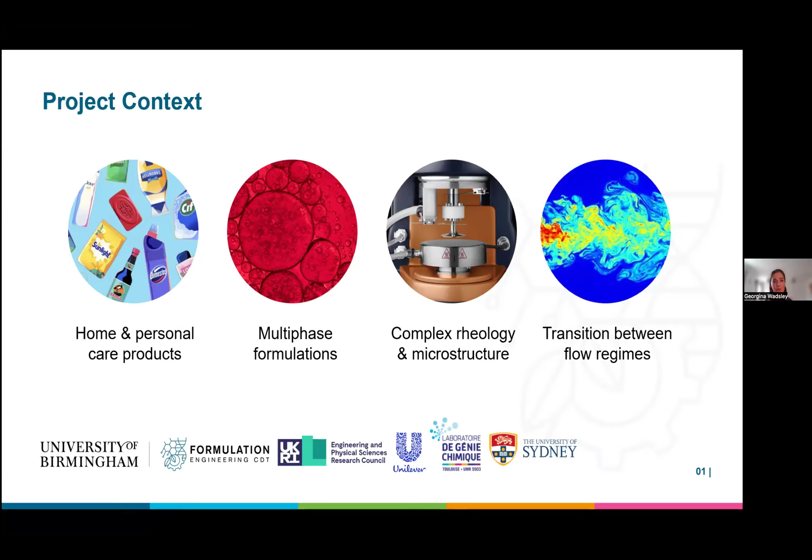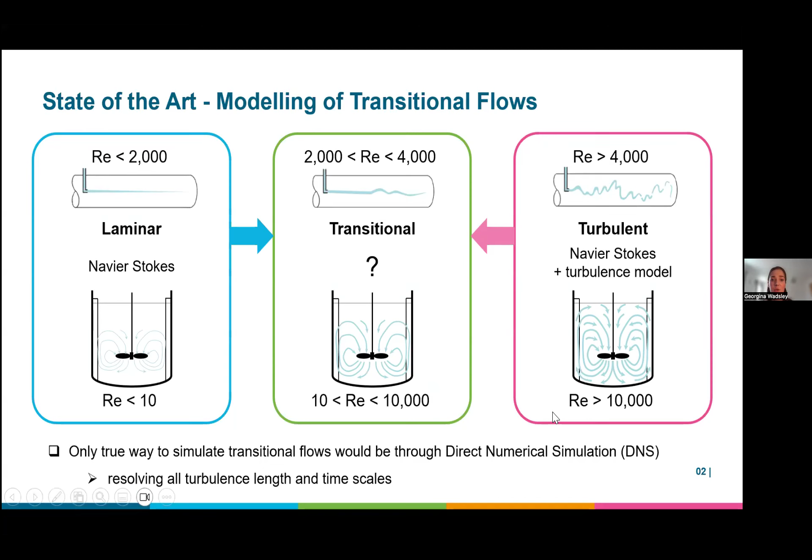Currently, we know we can use models in CFD, computational fluid dynamics, for modeling stirred tanks and pipes in the laminar regime through direct solving of the Navier-Stokes equations, as well as with the application of many turbulence closure models for high Reynolds number flows. However, when you move into the transitional regime, how we can do this in an industrially viable way is not yet clear. So the only true way to simulate these transitional flows would be through direct numerical simulation, resolving all turbulence, time, and length scales, which would be highly computational and not feasible in industry. So what's the next best thing?

So Mercado et al. found that the transitional regime, although typical values are given between Reynolds numbers of 10 to 10,000, some people have found that even at Reynolds numbers as high as 300,000, fully developed turbulent flow was not yet seen in the full height of the tank.

As well as looking at flows for similar Reynolds numbers within the transitional regime, they should exhibit self-similar flow hydrodynamics. Both Mercado et al. and Mendoza et al. observed that the mean velocity profiles are not self-similar and depend on viscosity and tip speed in the transitional regime. I performed an initial pipe flow study that I won't discuss here, but this also revealed a lack of Reynolds number self-similarity of pipe flow past an orifice plate.

So often the frequency of perturbations in transitional flow means some instabilities may persist longer for some fluids than others. So my aim is an investigative approach.

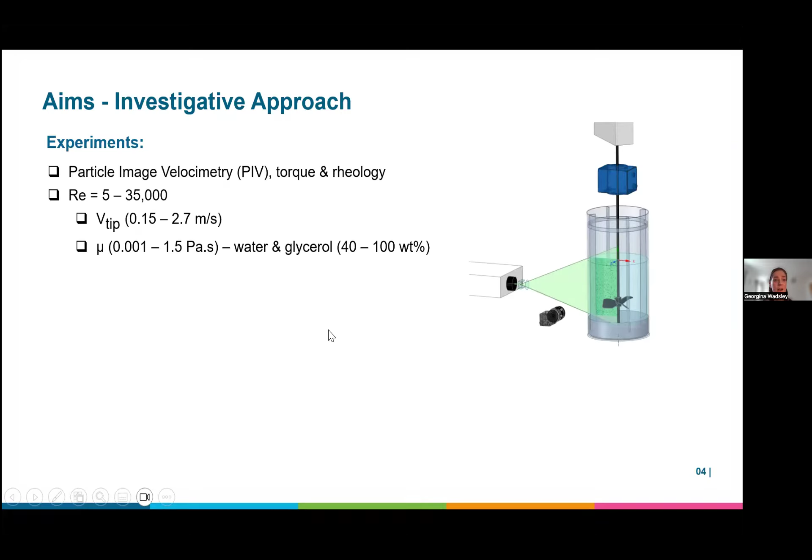I use particle image velocimetry as my experimental technique, as well as torque measurements and offline rheology. All the experiments and simulations I will present today were for Newtonian fluids, so not yet introducing this next level of complexity. This was for different Reynolds numbers varying between 5 and 35,000, using water and glycerol.

The aims were, from the torque experiments, to find the power number and Reynolds number relationship when looking at the power curve, as well as observing trends based on the literature review in normalized velocity magnitude and normalized turbulence kinetic energy, looking at changing Reynolds number for constant viscosity fluids to establish regime limits, as well as looking at self-similar Reynolds numbers with different viscosity and tip speed to look at scaling and self-similarity.

However, with the experiments that I did, I performed averaging over all blade positions. So I then looked at proper orthogonal decomposition, which is a technique that can be used to break down instantaneous flow fields into orthogonal modes.

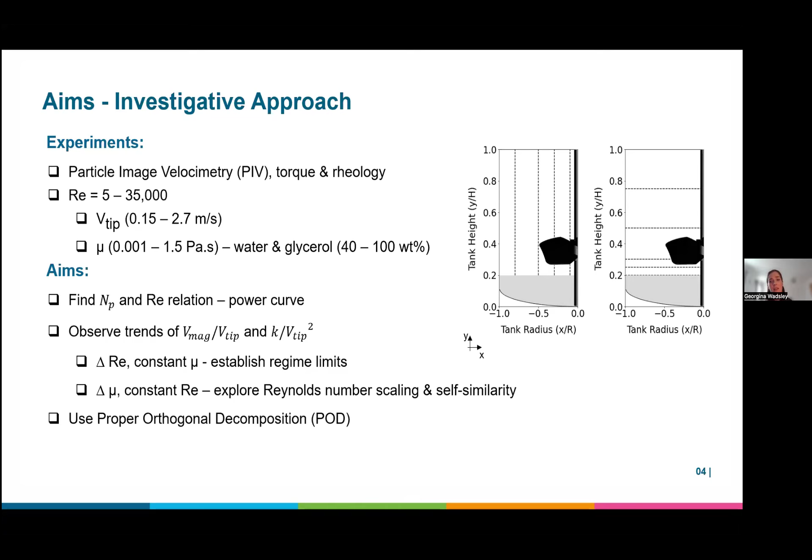And this has the potential to help distinguish between true turbulence and the pseudo-turbulence that is introduced through the periodic rotations of the impeller.

And then finally, looking at using all this experimental validation work to validate CFD simulations and explore existing turbulence closure models such as K-omega SST, using ANSYS Fluent here.

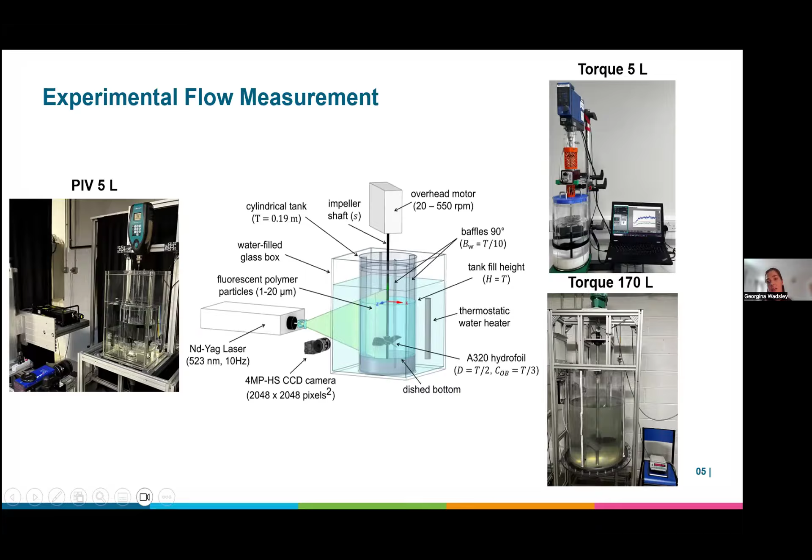So first, my experimental flow measurement. These were the different setups that I used: PIV and the torque on the right. I also performed all my experiments mostly at the small lab scale, in a 5-litre tank. But the torque I also performed for validation at the larger scale, with 170 litres.

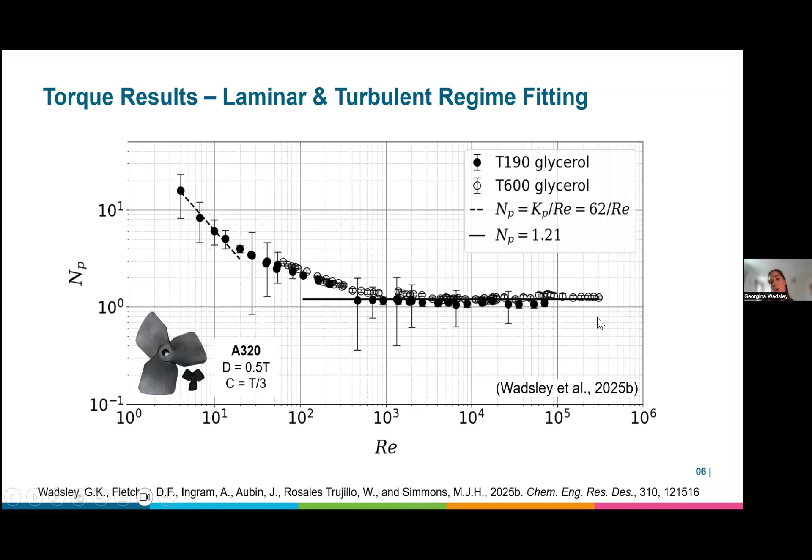So these are results from my torque measurements. Experimentally, I found that for the A320, with impeller half of the tank diameter and an off-bottom clearance of a third, and the tanks also baffled, the power number was around 1.21, and the laminar constant was 62.

So mainly looking at the flow fields, obviously there was a wide range of Reynolds numbers that I looked at. So I gathered a wide range of data, and it's about how to extract what is most important.

Therefore, within the same tip speed range of the impeller, the Reynolds number increases. However, the transitional regime boundaries were found to change with decreasing fluid viscosity. For example, to transition to fully turbulent flow, you need a higher Reynolds number for lower viscosity fluids.

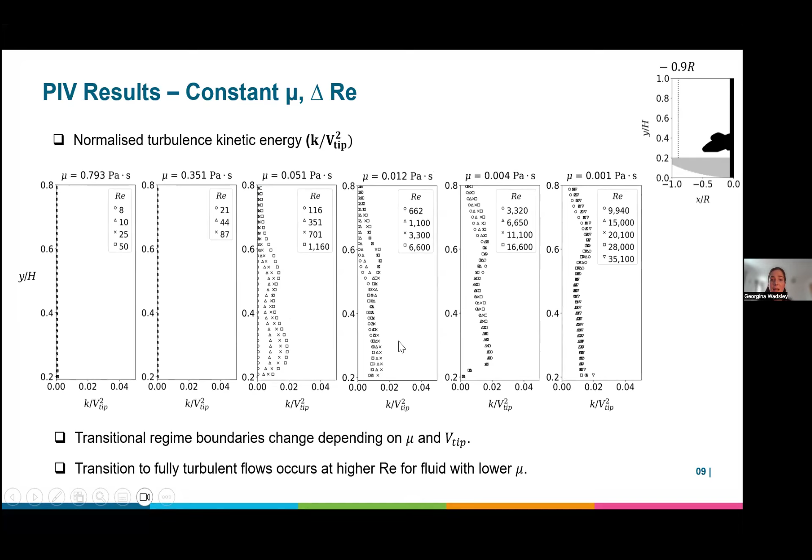And this is the same for turbulence kinetic energy. You see a collapse of flow profiles as you increase in Reynolds numbers, yet the collapse is at lower Reynolds number for higher viscosity fluids.

However, if you look away from the impeller, the flow is actually not yet fully turbulent as you would expect. So Reynolds number independence is true only near the impeller, and this causes a level of complexity when you want to try and model that using CFD.

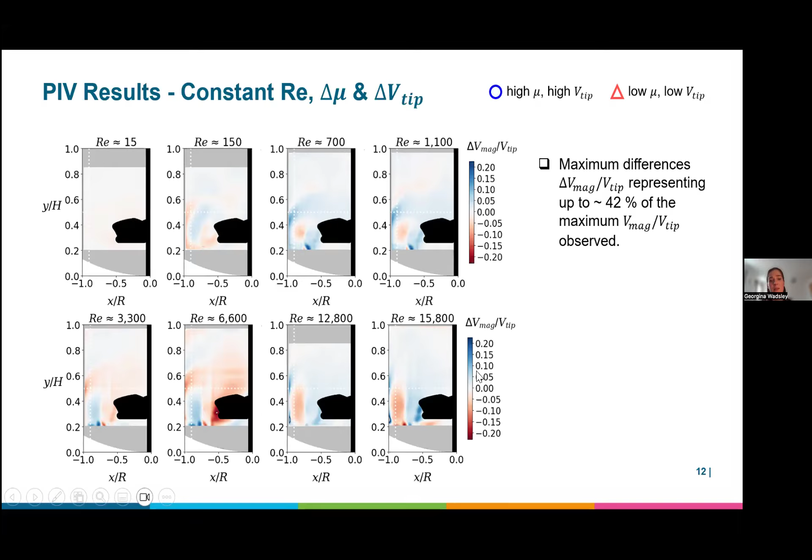This is the velocity magnitude, and a similar thing was shown with the turbulence kinetic energy differences. At these lower Reynolds numbers, the differences are very small, yet throughout the transitional regime, despite similar Reynolds numbers, the complex interplay between the viscosity and tip speed shifts the balance between the energy input and the flow resistance, leading to a slight difference in the flow patterns observed.

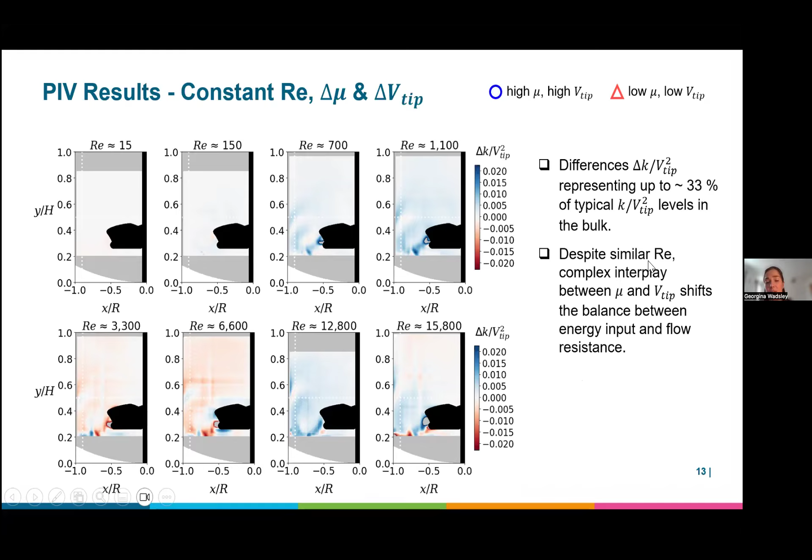And here the differences represent up to 33% of the typical levels of turbulence in the bulk flow. Again, this just highlights that the normalized mean velocity profiles do not exhibit Reynolds number self-similarity.

But how can we get this out of CFD simulations when CFD simulations are based on the Navier-Stokes equations, which typically are normalized to depend only on the Reynolds number?

So proper orthogonal decomposition, I'm not going to go too much into the background of how this is done, but more how this can be used. This is a technique used to break down instantaneous flow field data into a set of orthogonal modes ranked by their energy content. The first piece of information we can get out here is the eigenvalue spectrum.

So how the kinetic energy of the fluctuating velocity field is distributed across the modes. This straight line here is the slope of the modes to minus 11/9, which relates to the inertial subrange of fully turbulent flow. This is for a very low Reynolds number, but as you increase in Reynolds number, you would expect this energy distribution to be higher. Also, this plot only shows the modes containing 95% of the energy.

So for large scale motion, we start here, and as the scale of turbulence decreases, so we have high energy, large scale motion. As you decrease down the cascade, you get to smaller and smaller scales with smaller amounts of energy.

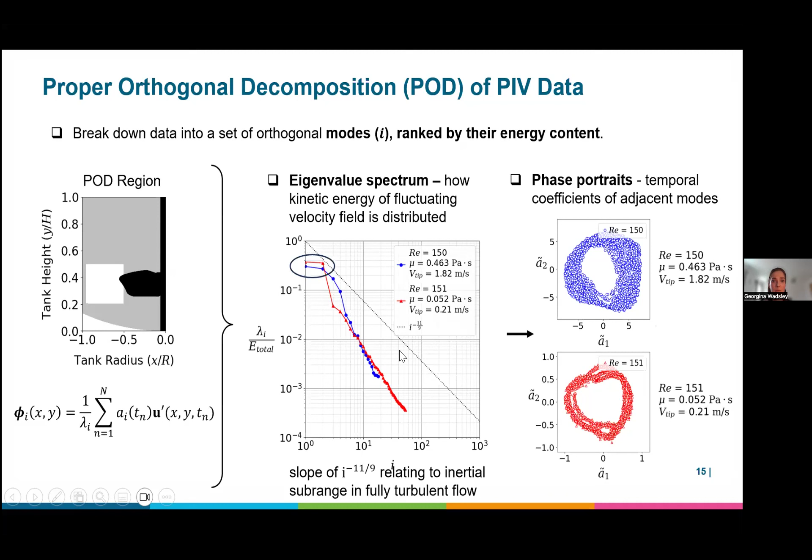This here shows the phase portraits of those two between the first and the second mode. The spatial coefficients identify the most dominant patterns or structures belonging to each mode. So here the first mode is most representative of the turbulence kinetic energy within the region that I have done this over.

And then more here you can see the breakdown of where the rest of the energy is distributed. So you could begin to see why there may be some differences between two cases at a similar Reynolds number. You can see modes 3 and 4 here are quite different to modes 3 and 4 there, and there you get a difference in the energy distribution, which could lead to a difference in the flow patterns observed between two cases that have a similar Reynolds number, yet different viscosity and tip speed.

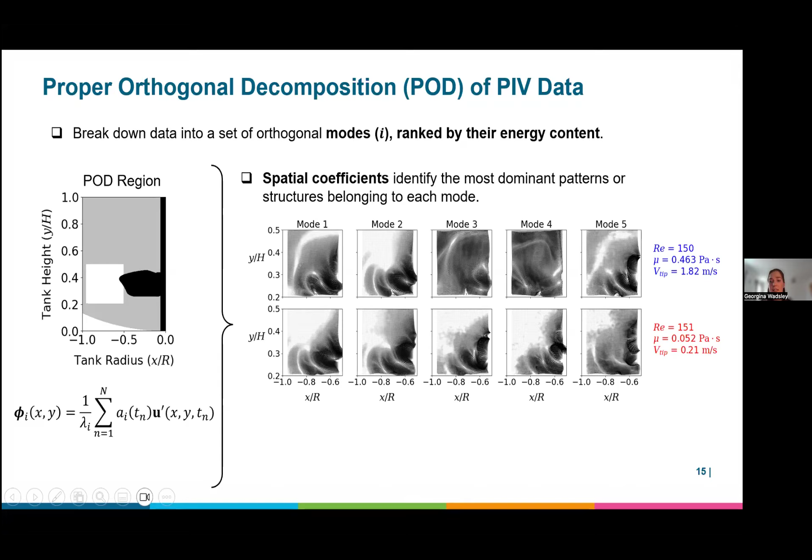There is a limitation, however. My PIV acquisition frequency was capped at 10 Hertz just due to the abilities and scope of the equipment available. So in this PIV data alone, we cannot see whether this may also have frequencies related to the impeller frequency.

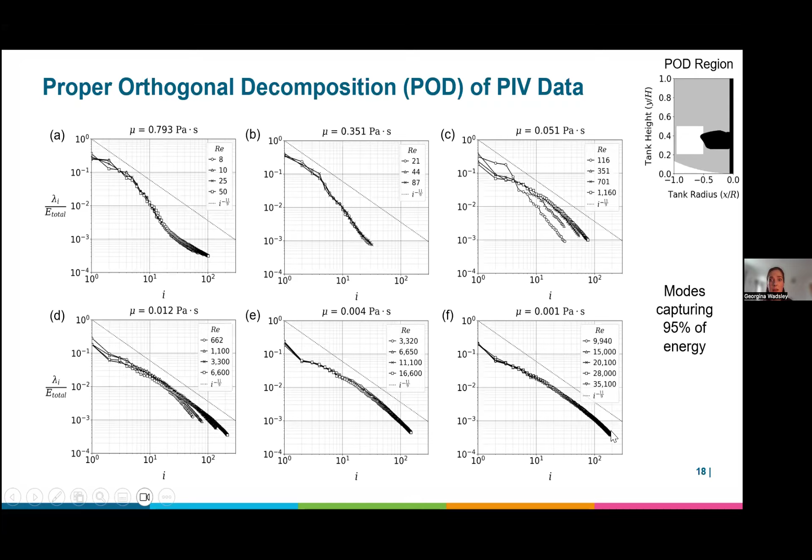This could be useful when trying to model or compare simulation and experimental data. And then you see when you start to reach the fully turbulent regime, the eigenvalue spectra are quite similar. So have we actually reached the fully turbulent regime?

So onto the CFD validation. The model I've chosen is stress-blended eddy simulation. So why this? LES is the spatial filtering of the Navier-Stokes equations, which resolves large-scale turbulence up to the limit of the grid or mesh, and models small-scale structures less than this.

This is of greater computational accuracy than the RANS model, which involves the averaging of the time or ensemble averaging of the Navier-Stokes equations, but must introduce the Reynolds stresses, which then need to be resolved with the addition of a turbulence closure model. Here it's the K-omega SST closure model.

RANS works quite well close to the wall, whereas LES requires the addition of wall functions when resolving close to the wall. And here in the stirred tank, you have the impeller and the walls, so this is very important in confined flows.

SBES is able to switch between the two. For example, with this default blending function, the red represents where the model will run in RANS, and where the model will run in LES. This also showed promise in my pipe flow study as well.

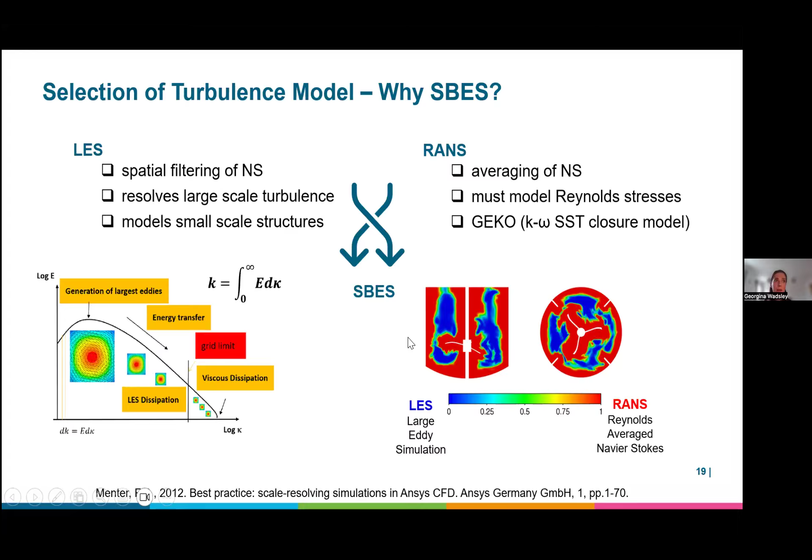So how the simulations are set up: data sampling on a fixed plane, averaging over all blade positions to get the same type of data that I got from my PIV measurements.

I also looked at taking periodic sampling, so every full rotation, to try and estimate the pseudo-turbulence due to blade contributions, when comparing averaged data at a specific blade position versus over all blade positions. But I really focused on looking at all blade positions because this is directly comparable with the PIV data I had, and then performing transient sampling, and on this also doing proper orthogonal decomposition on my experimental data.

One thing that's very important with the stress-blended eddy simulation and LES models is to ensure that the number of rotations, or the amount of data collected, is sufficient to have a stable averaging of the velocity, magnitude, and turbulence kinetic energy.

A few simple solution checks must be performed when using SBES. So you have the wall Y plus, which must be small enough for the Navier-Stokes equations to integrate straight to the wall. The cell convective Courant number must be around 1 or less than 1 in order to get a good estimation of flow.

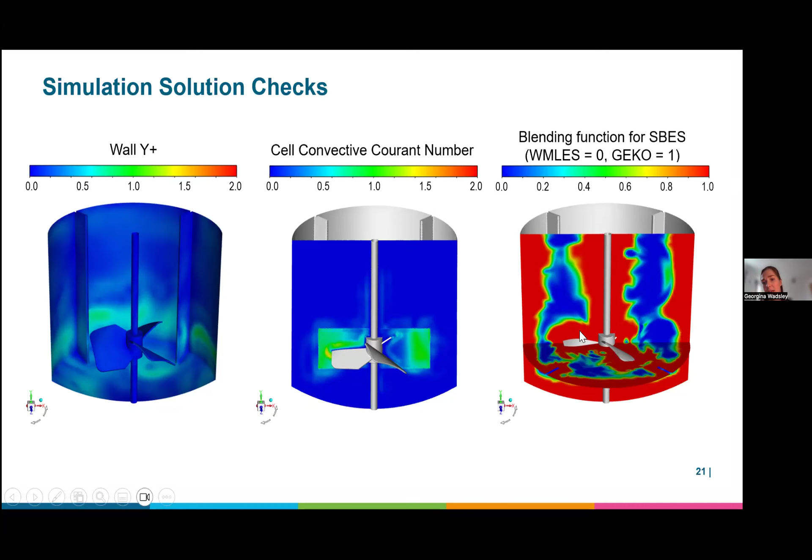However, when running some of my simulations, I found that the default blending didn't necessarily work so well, or it couldn't trigger the LES in regions where you would want it, resulting in insufficient triggering of LES. So at high Reynolds numbers of 35,000, LES was triggered very well and covered most of the flow. At 700, the LES region was reduced, and at 300 this was reduced further.

So in order to compare, I also looked at running with a fixed blending distance, so that I could compare the GEKO model, SBES, and SBES with a fixed blending distance to see the effect on the results. For torque validation, I used the laminar model in the laminar regime, but I've also looked at all three models across different regimes.

The laminar model was validated for torque prediction in the laminar regime. The GEKO and SBES closure models were validated for impeller torque across all regimes, and the results fitted very well with the power curve. So if you're just wanting to look at the level of torque from the impeller, that's okay.

However, when looking at the torque balance between the impeller and the walls, therefore the ability for the simulation to capture and resolve the distribution of eddy dissipation from the impeller right the way through the fluid.

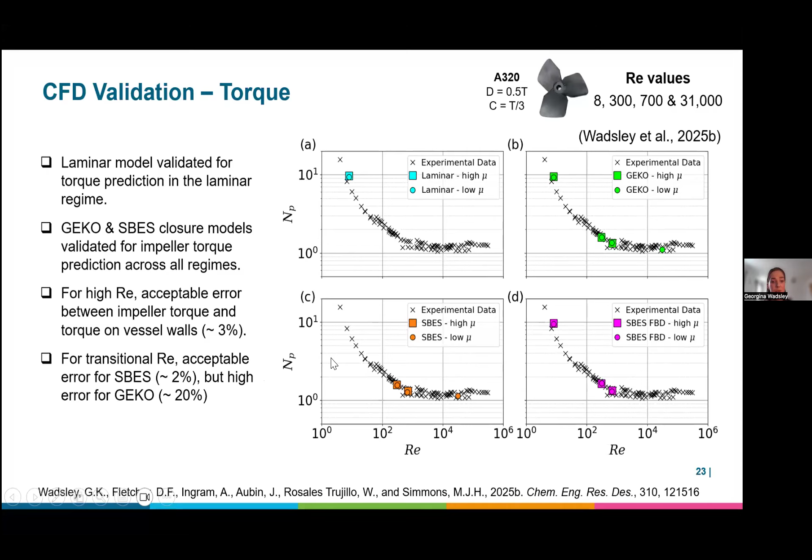Just for a simple check, I ran some laminar steady state solutions. My aim was to work from low Reynolds numbers and push the laminar model up to where it didn't work anymore, before then looking at the turbulence closure models, working from a high Reynolds number and pushing them downwards to see where they work well or where they start to break down.

And again, as we move up and really use the laminar model where you wouldn't expect it to work, we start to see unrealistic flow fields, necessitating the use of turbulence closure models.

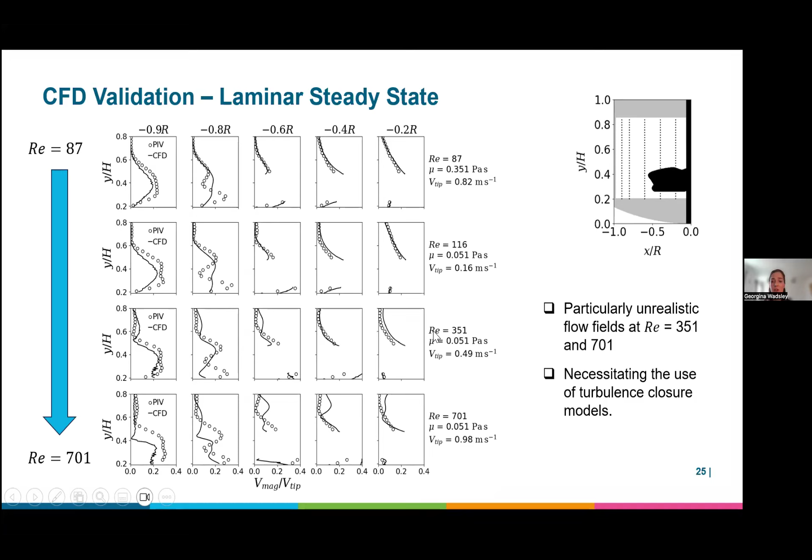So, like I said, now we're using the turbulence closure models and we're working down from fully turbulent flow, pushing them into the transitional regime.

Yet when we look at the normalized turbulence kinetic energy, the flow profiles are quite similar for SBES and PIV. However, the flow profile of GEKO predicts areas of high turbulence regions in unexpected locations, particularly above the impeller. You can see this as it doesn't quite follow the axial and radial profiles as well. It still does an okay job, but when you look at this contour, maybe not.

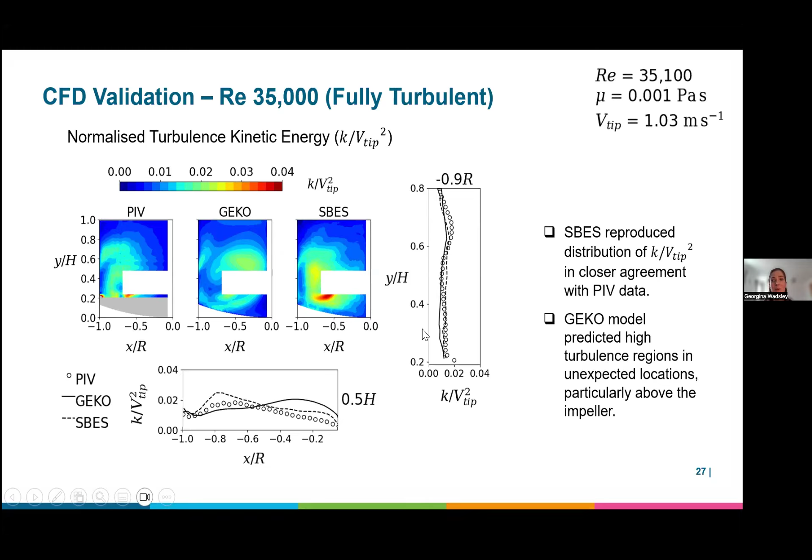And then looking at the SBES model, comparing the POD results between PIV and SBES, we see quite a similar distribution of the turbulence kinetic energy between the modes containing 95% of the energy.

Notable at this high Reynolds number, the slope of minus 11/9, which represents the inertial subrange of turbulence, we're looking at a gradient quite similar to this. So it looks like we're in fully turbulent flow.

In terms of the temporal coefficients, as I mentioned before, the PIV data is somewhat restricted by the Nyquist frequency for measurement acquisition from the PIV. So we can't see whether or not there are any peaks at harmonics of the impeller frequency, and therefore if we're seeing true macro instabilities or not.

Yet the SBES is showing a very similar distribution, with a large magnitude of low frequency peaks which could represent macro instabilities.

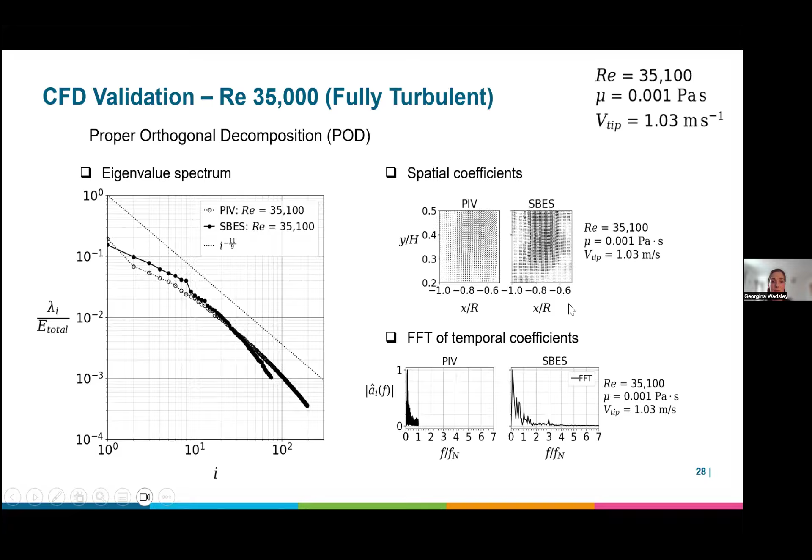This is more obvious when you look at the axial and radial flow profiles. The SBES more closely predicts what we observe.

However, despite differences between the two experimental cases at a similar Reynolds number, all the turbulence closure models - GEKO, SBES, and SBES with the fixed blending distance - we always see self-similar results.

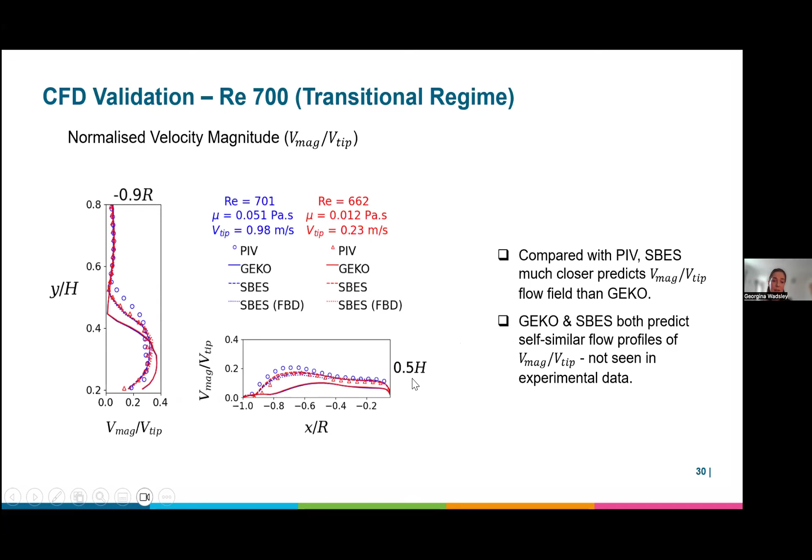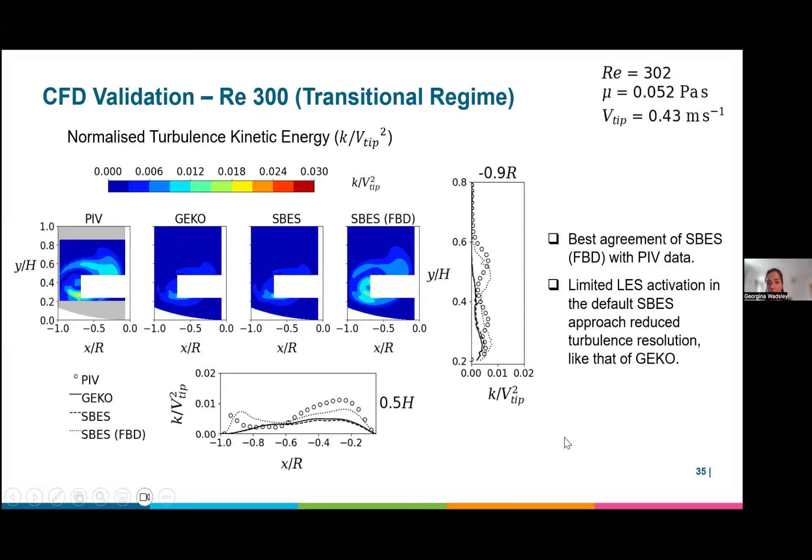So we've compared this SBES with fixed blending distance and the proper orthogonal decomposition results. Again, we see a very similar distribution of the turbulence kinetic energy between orthogonal modes when broken down, a very similar spatial distribution. And here we can compare the frequency at which we observe the spatial distribution of the turbulence kinetic energy.

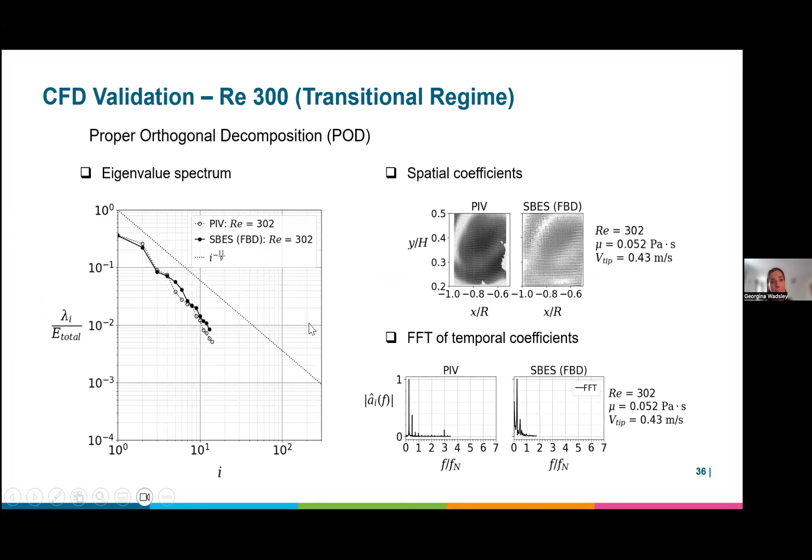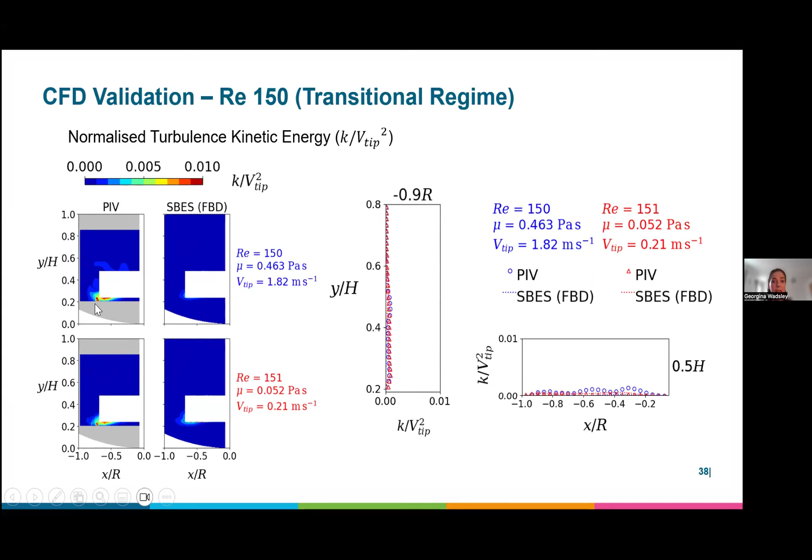Now we're moving more to the lower transitional regime. Here I've just chosen to compare the SBES fixed blending distance results, as we know that we're not going to receive as much LES activation, or sufficient LES activation, at this low Reynolds number. But it does show the promise of the SBES with fixed blending distance, even at this low transitional Reynolds number, and again a very small turbulence kinetic energy. Although there is slightly more turbulence kinetic energy observed in the PIV data, which can be shown here by the distribution of the turbulence kinetic energy between modes, where the SBES FBD model concentrates most of the fluctuation energy in fewer modes than observed experimentally, which may show slightly higher fluctuation, a higher level of small fluctuations in the experimental data that are not observed computationally.

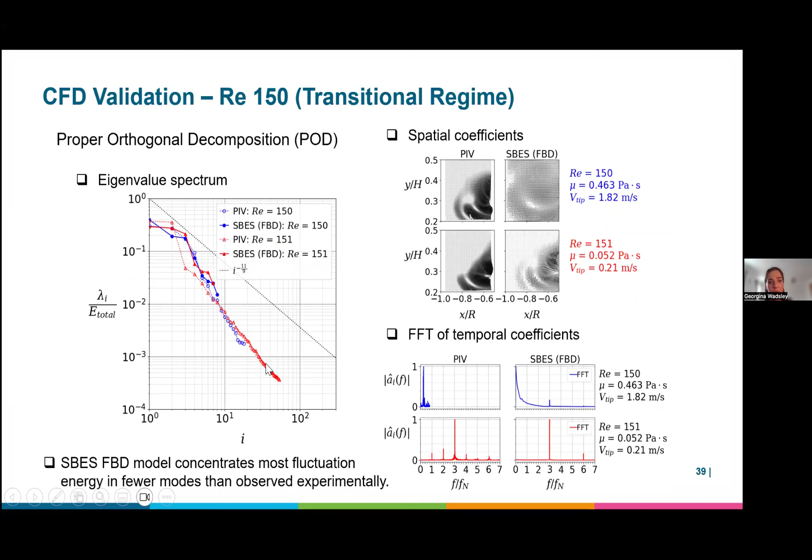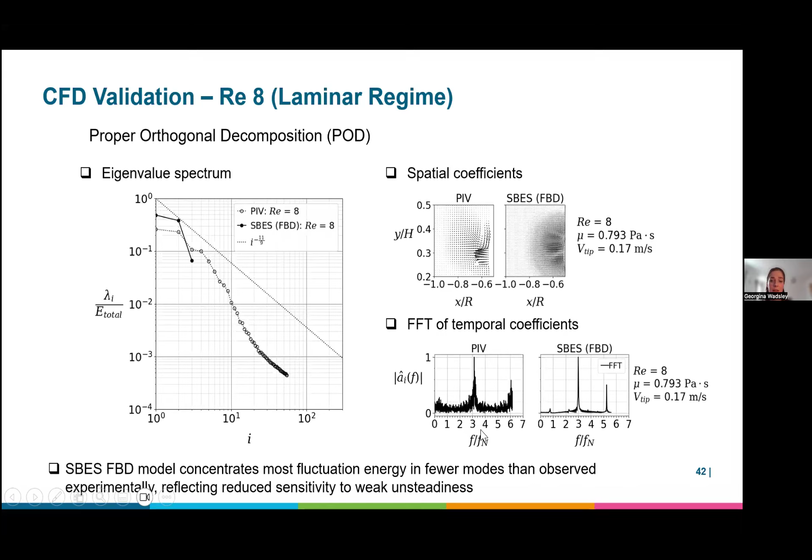So at 3 times the impeller rotation frequency, that's equal to the blade passing frequency, and we see large peaks at 3 and 6 for both the PIV and the CFD data.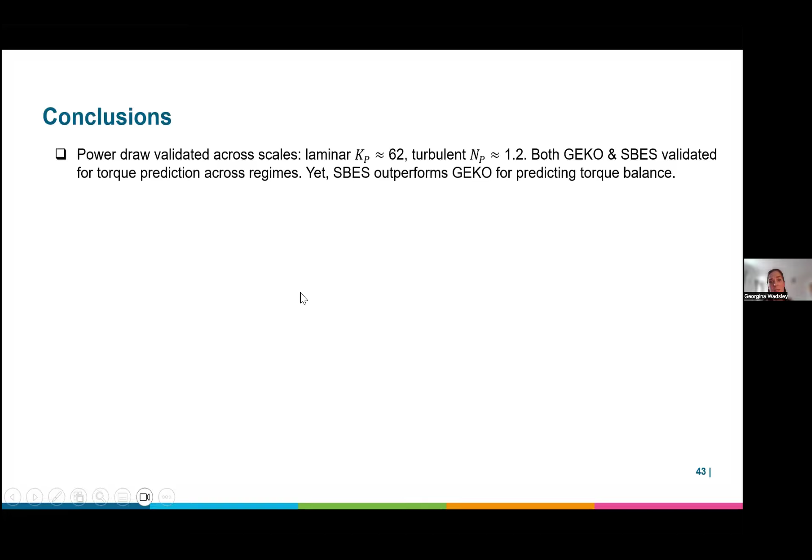So my conclusions are: the power draw is validated across scales. So we have a laminar constant of 62, the turbulent power number is 1.2 for this A320 impeller. Both GEKO and SBES are validated for torque prediction across regimes, yet SBES outperforms GEKO for predicting torque balance. The transitional flows are spatially heterogeneous. Turbulence begins near the impeller at a Reynolds number of around 1,000, and does not reach fully tank-wide fully turbulent behavior even at a Reynolds number of 35,000.

The viscosity and tip speed shift transitional boundaries, with high viscosity fluids reaching Reynolds independence earlier. Reynolds number alone is not necessarily a universal scalar - identical Reynolds numbers can give different distributions in turbulence kinetic energy experimentally, yet the turbulence closure models always predict self-similar flow. However, the proper orthogonal decomposition shows a shift from coherent to chaotic dynamics with mode energy spreading, and suspected low frequency macro instabilities emerging in transitional or turbulent flows.

The GEKO model provides sufficient solution accuracy for prediction of high Reynolds number flows with minimal computational expense, although it's not suitable for modeling transitional flows.

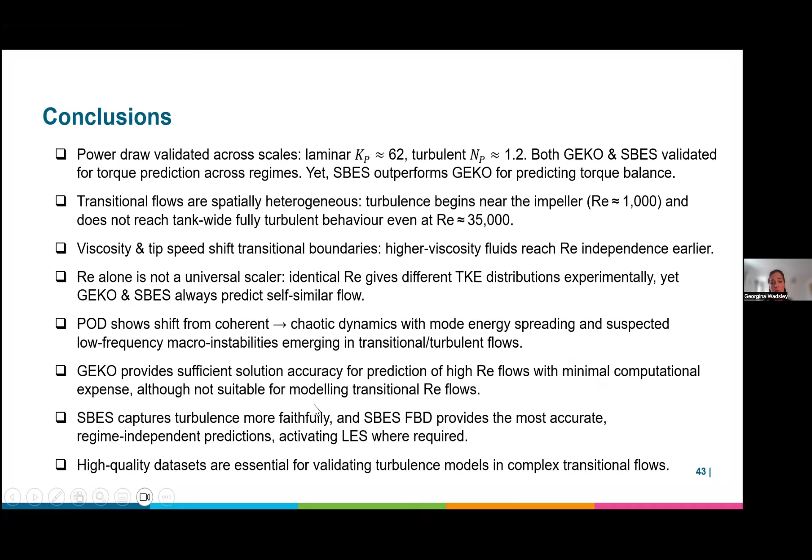The SBES shows a lot of promise, capturing turbulence more faithfully, and the SBES with fixed blending distance provides the most accurate regime-independent predictions, activating LES where required. This highlights that high-quality data sets are essential for validating turbulence models in complex transitional flows.

Here are some notes for future work following on from my thesis: start exploring alternative multi-parameter scaling approaches and move beyond Reynolds number by incorporating local shear rates, viscosity, tip speed. These are all suggestions for what to look at next.

Ensure to increase the temporal resolution of PIV, with a Nyquist frequency greater than three times the rotation frequency, as this would increase the reliability or usability of the proper orthogonal decomposition.

Extend studies to non-Newtonian fluids. This was all done in Newtonian fluids, and assess how complex viscosity behavior shifts the transitional regime onset, distribution, and power draw. It's also important when doing this to evaluate and compare rheology models, focusing on parameter sensitivity and avoiding overfitting, and improve confidence in effective viscosity predictions.

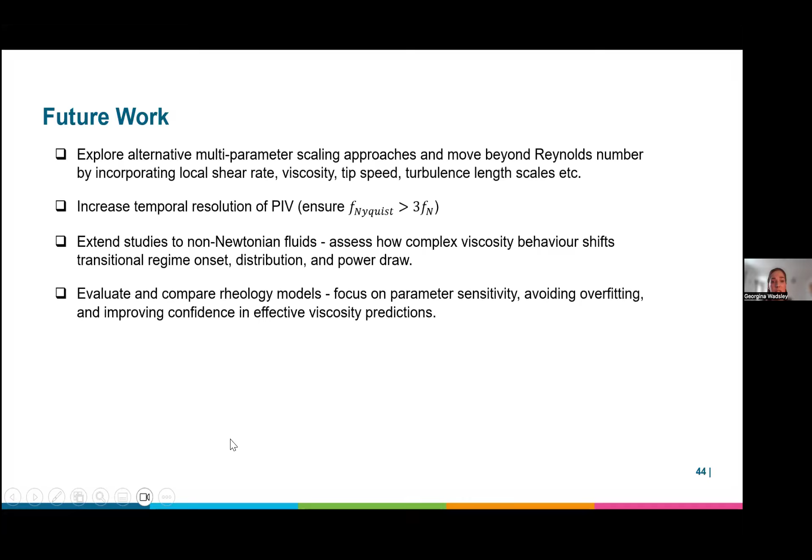I think the SBES FBD model does show a lot of promise in modeling transitional flows. However, this could be refined, optimizing the blending distance and exploring adaptive flow-dependent blending to balance turbulence resolution with computational cost.

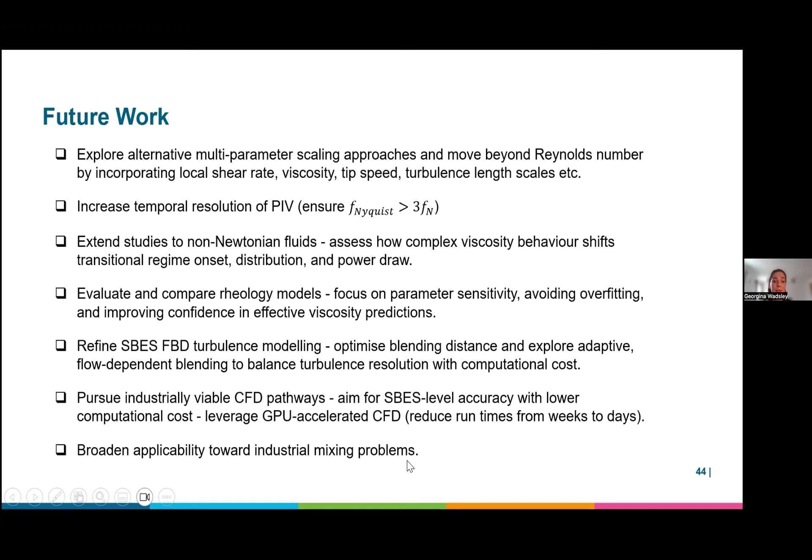Also, it's important to pursue industrially viable CFD pathways, aiming for SBES level accuracy with lower computational costs. This has improved a lot throughout my PhD with the ability to leverage GPU accelerated CFD, reducing runtimes from weeks to days, and broaden the applicability towards more industrial mixing problems.

So thank you very much for listening, and I'm happy to answer any questions or discuss.

And the question that I wanted to start with is why move to large eddy simulations to begin with? Because there are definitely some articles out there that show that Reynolds averaged Navier-Stokes simulations can quite adequately capture mixing behavior.

For example, the paper by Coroneo et al. from 2011 shows this convincingly, I think, for a single Rushton stirred tank system. And also, well, there has been some debate about whether you need a certain turbulent Schmidt number in order to accurately predict mixing or not.

But also this article says, well, you don't have to tune anything as long as you have your mesh in order and your turbulence model selected well. Which was very nice, of course. And compared to LES, RANS does still save us a lot of time, even with GPU acceleration.

However, when we looked a little bit deeper into literature and started looking beyond the single Rushton system - this was during my PhD in 2016, 2017 - we saw that with multi-impeller systems, Reynolds averaged Navier-Stokes models tend to predict mixing quite a bit less proficiently, or at least you would have to tune the turbulent Schmidt number in order to get adequate predictions of the mixing time.

And relating it to the statement of Coroneo about turbulent viscosity, we thought, well, let's have a look into that. Apparently with one impeller, things are going well, but as soon as we expand to multiple ones, things are not going so well anymore. So probably the issue is really in between the impellers and not around them.

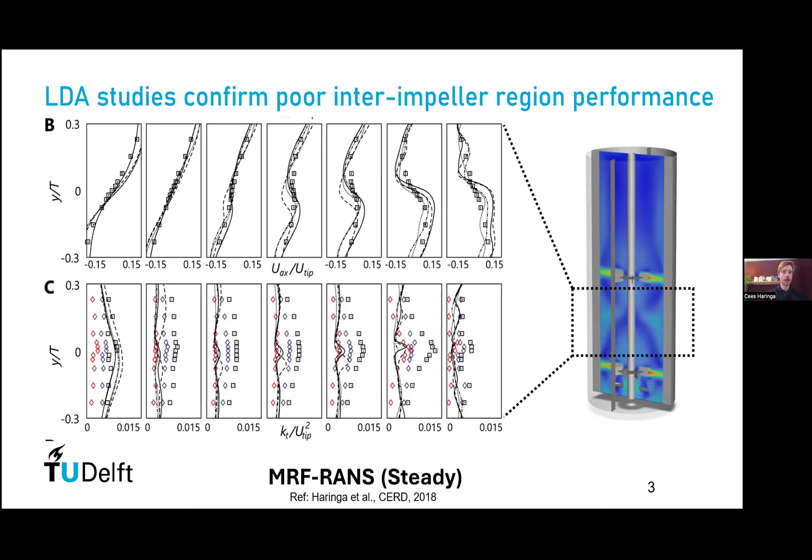So we moved on to different modeling approaches, one of them being large eddy simulations, and there we saw that with the appropriate treatment of turbulence, we could predict this peak in turbulent kinetic energy in the midplane between the two impellers. And then if we look at the implications for mixing time, also there we saw that the mixing time was very strongly impacted by this behavior.

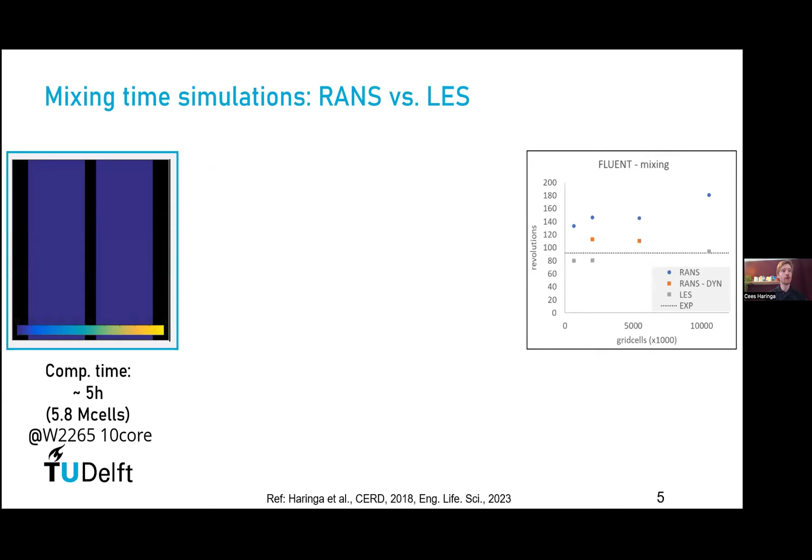If we look at the simplest situation, multiple reference frames, we saw that the mixing time was largely over-predicted, and eventually this over-prediction got worse with increasing mesh resolution, because the boundary between the compartments formed around the individual Rushton impellers became sharper and sharper.

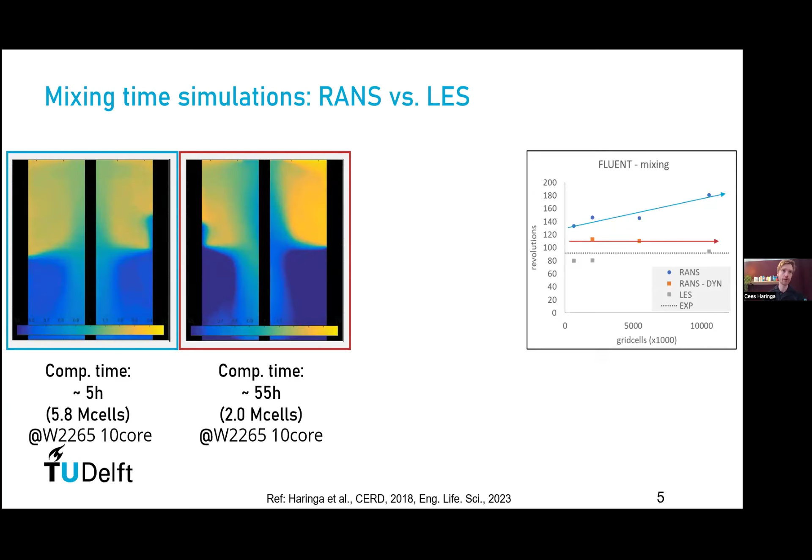If we then move to a sliding mesh RANS simulation, we did capture the impact of macro instabilities on the situation, which led to a situation that still over-predicted the experimentally determined mixing time, but didn't show the mesh resolution dependence anymore. And when we moved to large eddy simulations, we did see that we could also quantitatively predict the mixing times very well, in accordance with the experiments.

However, as you can see from the slide here, the computation time back then on a desktop CPU would increase a lot. Of course, we did not actually run this on a desktop CPU, but just for comparison, we also provided those numbers.

So we needed LES to accurately predict mixing time in this system, at the cost of computation time. Now, as was already mentioned in the previous presentation, nowadays we can luckily benefit from GPU accelerated methods. In this case, we also ran a Lattice-Boltzmann simulation a couple of years ago of the same system, where we could reduce the computation time for the whole mixing procedure to 17 hours. And also for finite volume, you see that these methods are becoming more readily available.

But this is still a single simulation. And in the end, we want to compare different cases, and we also want to know how robust our predictions are. So this is still N=1. So, okay, LES apparently has a benefit.

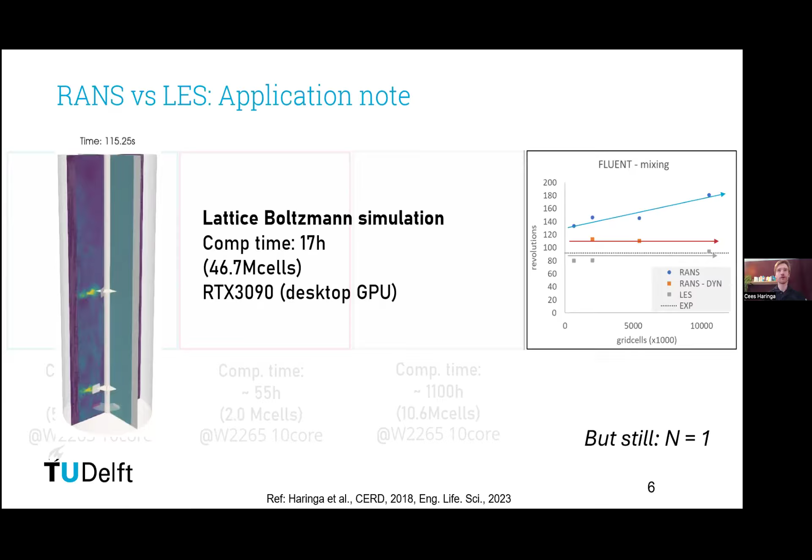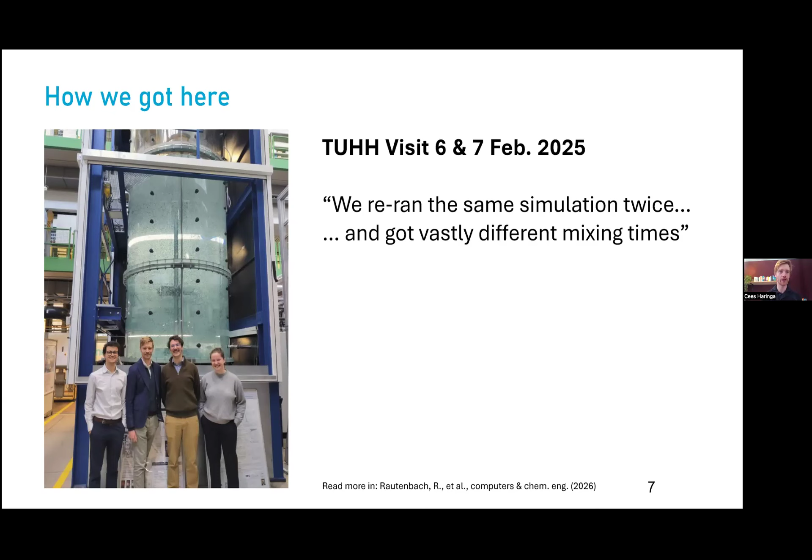Now, why this question of mixing time variability? This question came up during a discussion that we had at TU Hamburg last year, with Professor Schluter, who mentioned that they reran the same LES simulation twice and got vastly different mixing times. What's going on here? What's the origin and the impact of this?

Well, it was a situation that I did encounter before in another mixing study, but never really explicitly thought about. So we took it for granted that it happened. But of course, when you think about it more closely, it is an interesting finding in the sense that you would expect numerical simulations to be repeatable, reproducible. And we saw here that rerunning the simulation twice, it was not strictly reproducible.

So we wanted to know the origin and the impact. We wanted to see if this depended on the approach that we took, finite volume versus Lattice-Boltzmann, on the resolution of the case that we studied, as well as the numerical precision. Why all this? I'll get into that. And of course, what you're also interested in is how this compares with experimental variability, because an experimental quantification of the mixing time will inevitably have some variability in it.

So diving back into literature, it is not a surprise that LES is often irreproducible. There are other papers that talked about this, and the most notable one that we found was from 2008, by Senoner et al., who explicitly considered the effect of different aspects on variability in a very simple flow system. What they noticed was that eventually, like in direct numerical simulation, LES is sensitive to the exponential separation of trajectories. And the practical irreproducibility comes from the fact that every time we rerun a calculation, there will be small variations in how that calculation is being done.

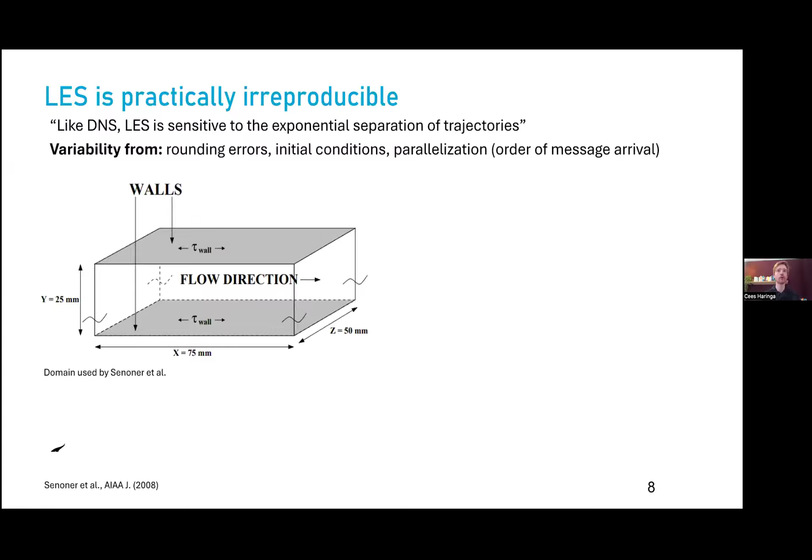What Senoner already described was that, well, LES is indeed sensitive to variability. Different sources eventually lead to the same type of behavior. And using higher precision arithmetic does delay the onset of visible differences in trajectories, but it does not suppress it completely. So here you see with different levels of precision, indeed, the number of iterations before which it becomes really noticeable is increased.

What is also important to mention is that the statistical characteristics of the simulations are not impacted. So if you look at long-term averages of kinetic energy, of energy dissipation, maybe of power number in case of a stirred tank, these will all converge to the same value in the end over a long time. But the instantaneous flow fields will differ. And this will have an impact on mixing.

Now, as mentioned, variability in mixing in itself is not something that's unique to LES. It also happens in mixing experiments. So this is an image from a large-scale fermentation mixing time determination by Vrabel et al., where you clearly see that the mixing time determinations have substantial error bars.

If you look in literature, there are papers that report confidence intervals on the mixing time determination, though it's not the case in all mixing time quantification work. So that's already something we'd want to say: keep in mind there is variability in experimental mixing, and please also characterize that when you're doing your experiments.

Here we have a time trace from a conductivity probe experiment. We will read the 95% mixing time from this, typically from the criterion where the dimensionless conductivity is bounded. But this trace will look a little bit different every time we rerun the experiment.

This variation initially has three sources. There will be some kind of measurement error, which can be a probe delay, but can also simply be other variabilities. There will be influence of the exact manifestation of turbulence in a particular experiment. And as was also mentioned in the previous presentation, there might be macro oscillations in the system, which have some impact on the mixing time.

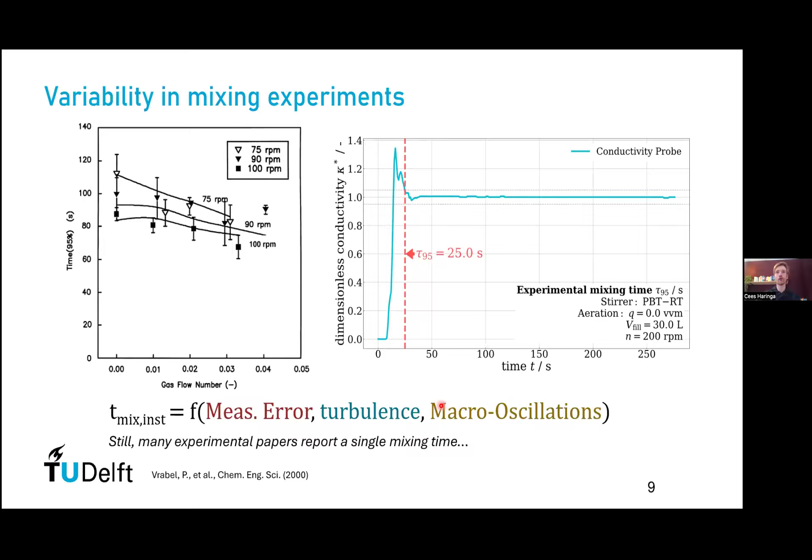If you look in literature, there are also whole studies on the impact of macro instabilities on mixing performance. For example, a study from Ducci and Yianneskis from 2007, where they timed the injection of a tracer compared to the phase of the macro instability, and showed that by feeding your tracer in phase, you would get a much lower mixing time than if you fed out of phase of such a vortex. So you could actually use that to improve the mixing time.

Typical frequencies of these instabilities are in the order of 10 to 100 impeller revolutions, so right in the ballpark where our typical mixing times also are. So you can expect some impact from that. Okay, so this is some background as to why we wanted to do this study.

Now, how did we go about it? First we had to quantify experimental mixing time. We used a 2-impeller stir tank available at TU Hamburg, with Rautenbach and those experiments, where we did 11 repeats with 2 conductivity probes of a tracer injection.

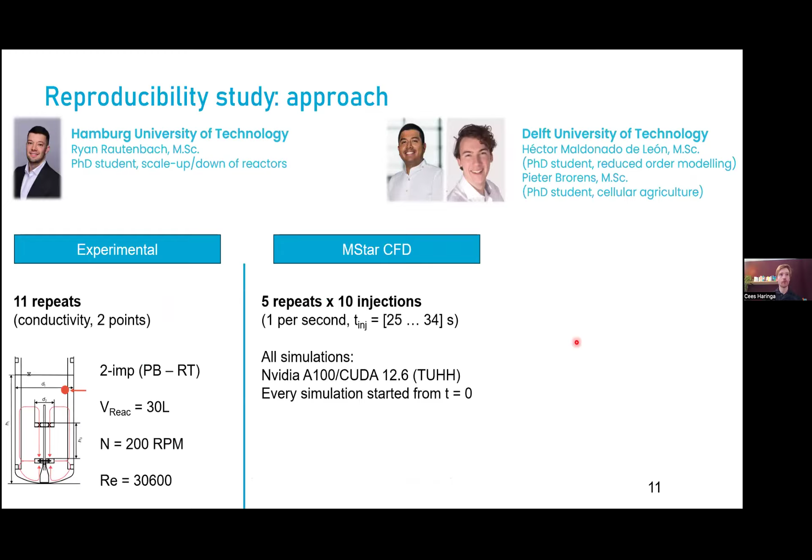Then we moved on to the numerical work, where we did studies in both M-Star and Fluent. M-Star is a commercial package that uses Lattice-Boltzmann CFD, while ANSYS Fluent is finite volume, as you might know. Both now support GPU acceleration, which we leveraged within the study because otherwise it would not be tractable.

In total, we did 50 simulations in both packages, split between true repeats and injections. For M-Star, we did 5 true repeats of the simulation, but also added 10 injections in every simulation with interspacing of 1 second, so that if there were notable macro instabilities in the system, we would definitely feed into different phases of this macro instability and repeat that - in hopes of being able to discriminate between these effects.

In Fluent, we effectively did the same: 5 repeats of the entire simulation, also with 10 interspaced injections. Due to the way Fluent is set up, we did not do these 10 injections literally in the same simulation, but started from the same starting file and injected a different initial file, so it was really 50 separate simulations in that sense. There is a bit of variation between how these things were run, but the overall idea is the same.

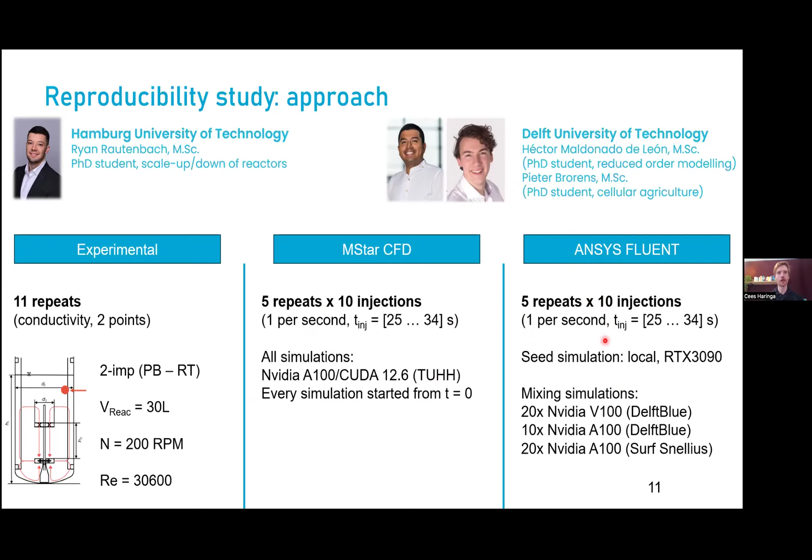Indeed, what we clearly saw in our simulations was this effect of irreproducible mixing. If we compare 2 runs of the exact same simulation, started from the exact same starting file with the exact same injection time, you do see that the profile that originates over time is quite distinct between the 2 simulations. You see it takes some more time for the tracer to reach the upper right corner of this slice, but there are definitely some differences in manifestation.

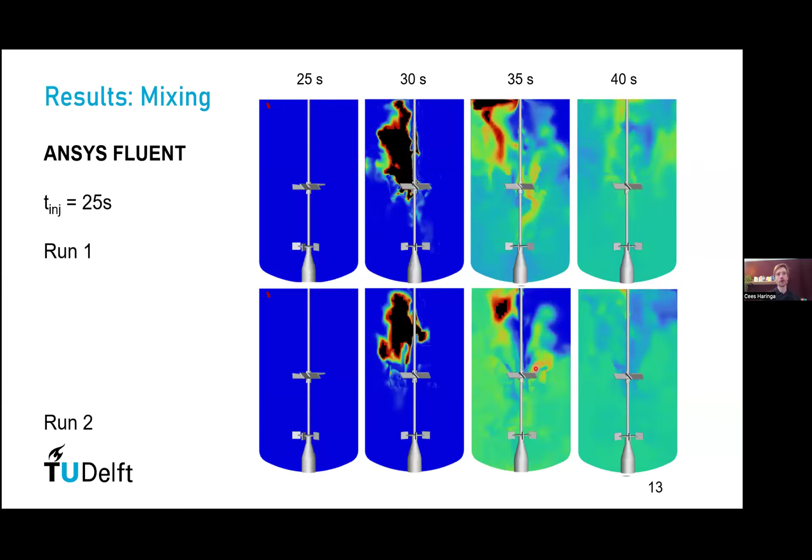Looking at the probe measurements—virtual probes located at the same points as the physical conductivity probes in the real experiment—we saw that between these two simulation reruns with exactly the same conditions, there was a large variability in the recorded T95: 20 seconds in one case, over 26 in the other. A substantial difference.

Coming back to the earlier question: is there a risk of misranking assets if we do a mixing study? If you run a single simulation and compare that result with a different asset, there might indeed be a misranking of which apparatus actually mixes best. So be careful interpreting a single LES study in that sense.

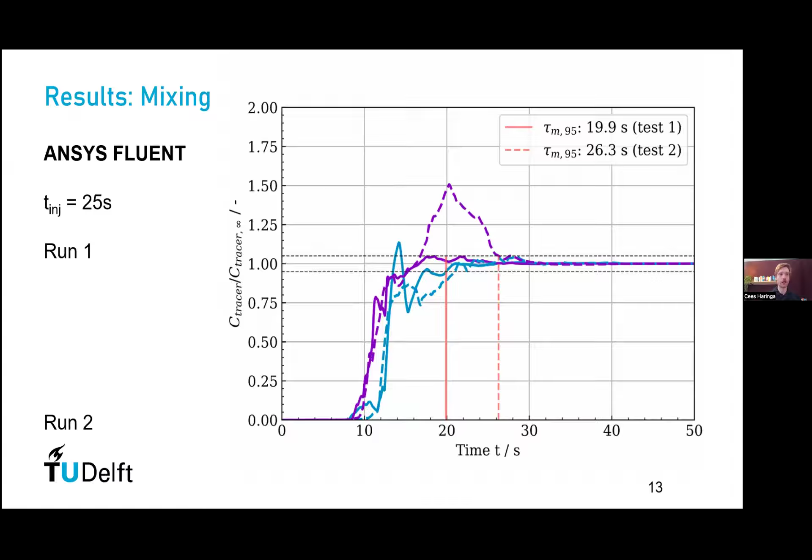Well, we had more than a single study at our disposal, so we looked at the experimental average compared to the numerical averages of all 50 simulations for each package. What we noted was that, compared to experiment, the numerical simulations tend to over-predict mixing time, although the variability still overlaps with the experimentally noted variability. Between the two packages, Lattice-Boltzmann and finite volume, there is actually very little difference.

But looking at the manifestation within the 10 individual injection times, it does seem visually that there is a bit more variation between tracer injection points in the case of ANSYS Fluent. This could relate to how we injected things in Fluent compared to MSTAR—possibly an initialization aspect. With the current data we couldn't really discriminate whether this reflects the impact of macro instabilities, so that needs more work.

We tried to find it from the autocorrelations in the signals, similar to what we did before with our two-Rushton tank, but the periodic fluctuations in the signal were definitely not as pronounced this time.

Looking at the mixing distribution in this violin plot in more detail, the overall distribution between the CFD packages is quite similar, but it overestimates the experimental mixing time somewhat, although the variability is rather similar.

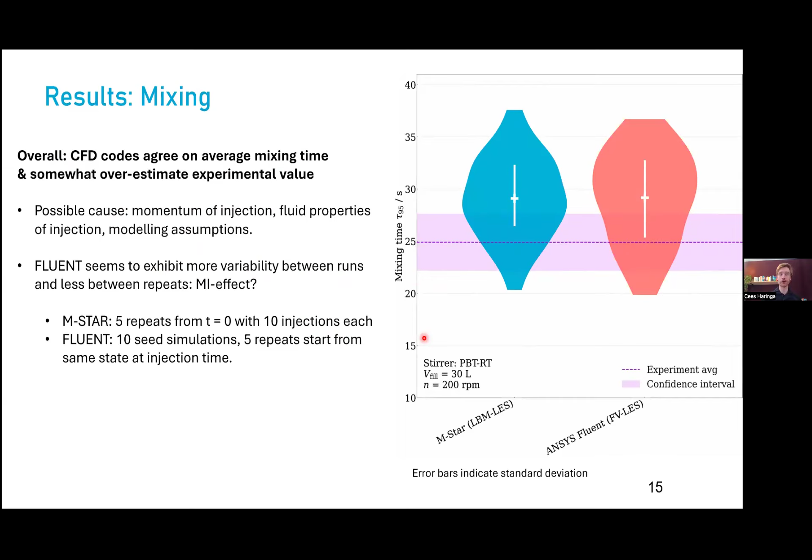So this was the base case simulations. We also wanted to know the impact of mesh dependency and numerical precision on this. Let's start with mesh dependency.

In Fluent, even with GPU acceleration, the simulations are still a bit more time-consuming, so we only considered two cases: 3.4 million grid cells and 1.2 million grid cells, where there is some difference in the violin plots. But looking at the overall average mixing time and its variability, they were actually quite comparable, and the power number between them was also very comparable, despite what I'd call a rather low mesh resolution for LES.

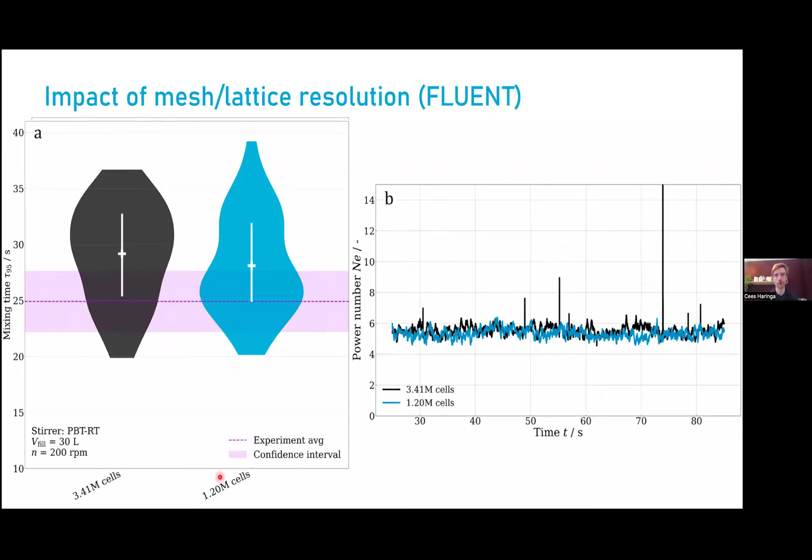We do see somewhat of a reduction in variability, but it definitely does not suppress variability altogether. Looking at the distribution, it does seem to be more in line with the bandwidth of experimental mixing times we also observed.

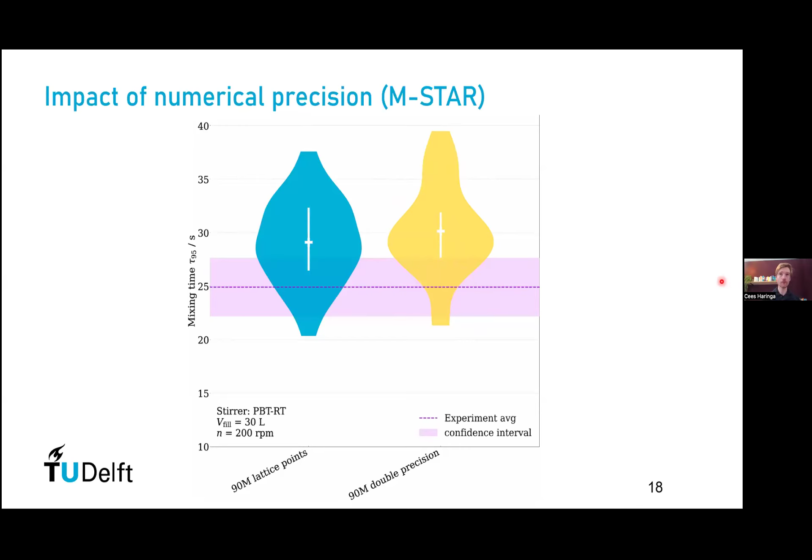So the key findings: in the bitwise sense, LES simulations are indeed practically irreproducible. A lot of that has to do with parallelization and the way computations are ordered. There are ways to fixate that, and there have been studies considering it, where things do become bitwise reproducible—but typically at the expense of additional computation time. Moving to higher precision delays this effect somewhat, but does not remove it.

Practically, this means that when you're doing LES simulations of mixing in such a system, be careful with interpreting them, and ideally repeat runs a couple of times so that you can also quantify confidence intervals, especially if you want to compare different assets with each other, such that you're not looking at the tail end of the distribution.

We did see that if you want to save time a bit, it seems to be an efficient way to do multiple injections in one CFD simulation so that you don't have to rerun the complete flow field all the time, but still you get nice proxy data from effectively multiple injection runs.

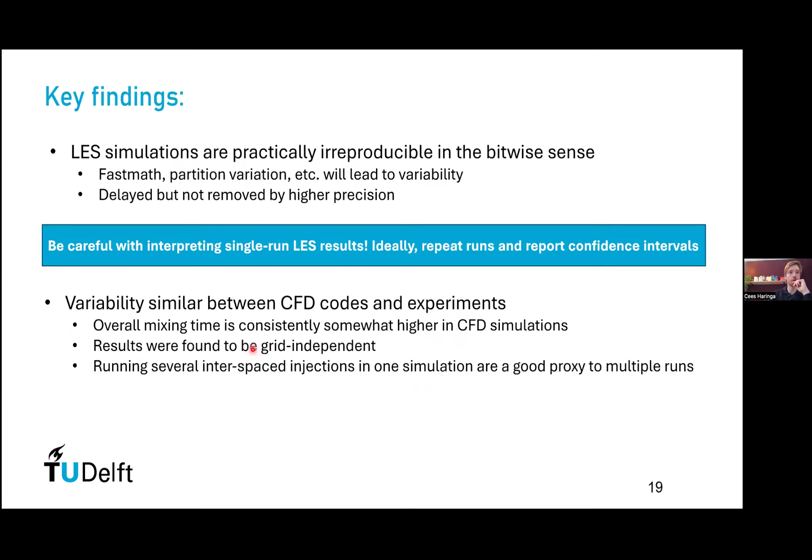The results were found to be grid independent, and also what we do see is that overall the mixing time is somewhat consistently overestimated in CFD simulations.

Ongoing work: we recently published this work in Computers and Chemical Engineering, so you can now find it at your disposal there. We're also still running tests with OpenFOAM. Ryan, who's running that, is hopefully going to report that very soon.

As mentioned, at the moment, we could not yet untangle the impact of macro instabilities from turbulence variability. It would be nice to look further into that. Impact of turbulence model and boundary treatment are also definitely things that should be looked into. So that's not something we did at the moment.

And we'd be very open to extend our study to other CFD codes. So you can actually find all the data and the geometry that went into writing the paper on our repository, download it there, and feel free to play around with it. And we're happy to hear from you what your findings are, of course.

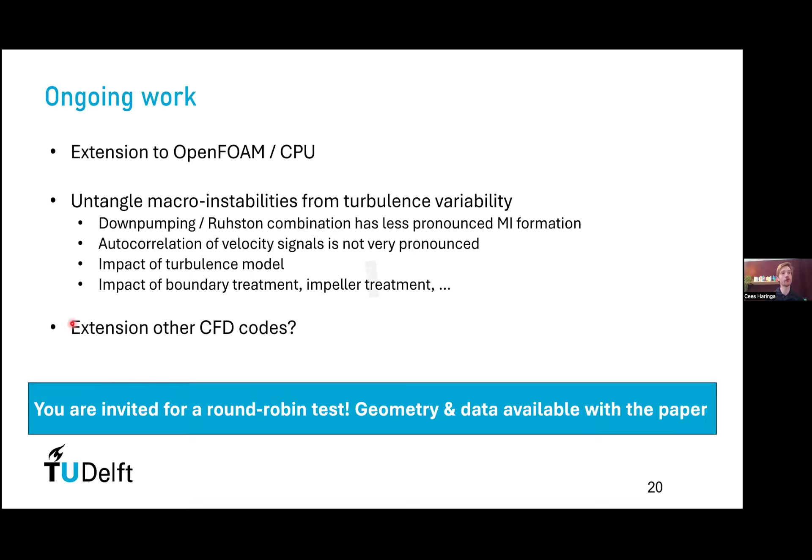We already had the first one, which was interesting, which came from SimVantage, who reran with our geometry and did not actually find a lot of variation in their results. So we already had a call with them. It might be that there's something going on in the background that fixes the order of computations there, but at the moment, that's not something we're sure of. So this is definitely already something we are looking into a bit more.

And as mentioned, you're all invited to provide your results as well, and we'd be happy to discuss.

Acknowledgements, of course, Ryan and Michael for the great collaboration with Hamburg. On my side, it was Hector and Peter that ran the simulations, and also, of course, the rest of the group. This was more or less a small sidetrack of our regular work, which is into hydrodynamics, mass transfer, and kinetics in bioreactors, reduced order modeling and hybrid modeling of bioreactors for digital twins.

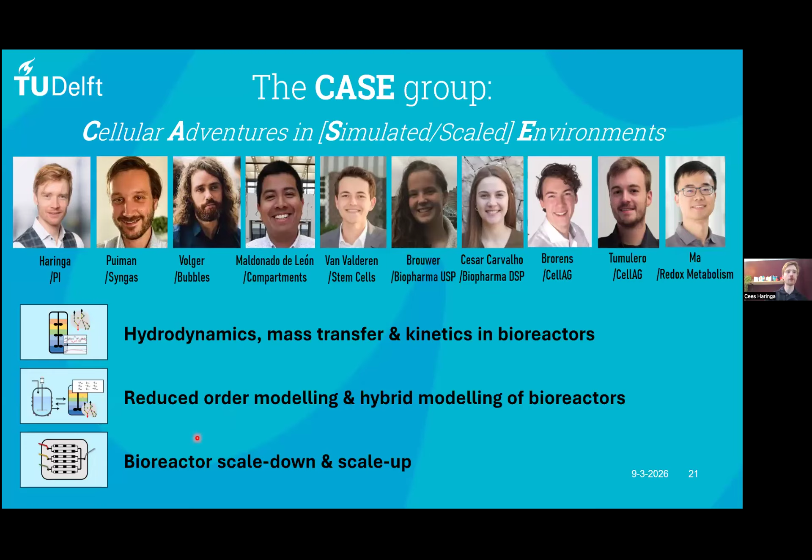I just saw that question pop up in the Q&A. We definitely work on digital twins there, but the CFD simulations go into that to be able to calibrate them. And I'm also very interested in bioreactor scale up and scale down.

In that light, we have a PhD position open if there's anyone in the audience that's interested in that.

And if you want to have a live follow-up discussion, the ideal moment would be to come to the SBES conference in November/December this year, where I'd be happy to see you all in Delft. With that, thank you very much for your attention, and I'm eager to answer all your questions.

Yeah, thank you so much, Cees. Joelle, is it okay that I overtake the next? Okay, so thank you so much for the very nice and interesting presentation.

We have a couple of questions, and I would like to start directly with Matteo Antogolini. He has two questions. The first one was: thanks for the interesting presentation. I was wondering if the scale of the tank may matter. The variability of mixing may be more pronounced in bigger size tanks, commercial size 100 to 1000 liter. What do you think?

Yeah, well, my traditional answer would be if we have a geometrically similar asset and we have the same Reynolds number, it should not be, but I just saw in the previous presentation that Reynolds number is not everything. Well, at least not if you go to transitional situations and maybe more complex rheology.

From the simulations that I've done so far of tanks of different sizes, we don't see a very pronounced effect as long as we're in geometrically similar and fully turbulent cases. But it's definitely something that always can deserve a bit more attention, even if it was just for collecting more large-scale data, because we don't have a lot of that.

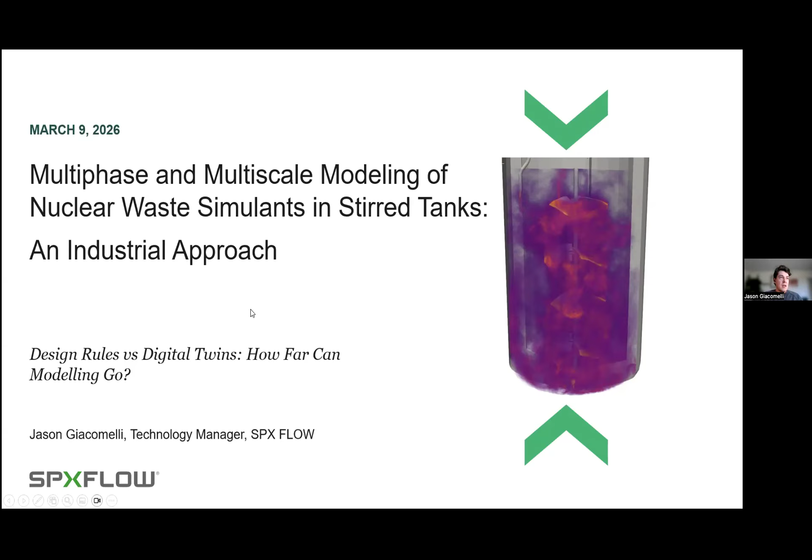Okay, so let's talk about some multiphase and multiscale modeling of nuclear waste simulants in stirred vessels. And I wrote 'an industrial approach' because it's a bit pragmatic, practical. These projects can't last 4 years, we're on a tight timeline usually, and on an even tighter budget. So I thought this was a great topic. We did this about 4 years ago for the Department of Energy, and the gentlemen we worked for were nice enough to let us present this outward. This is actually the first opportunity we get to talk about this, and there's probably 2 hours of talk really on this project that I could go into, so we're going to do a pretty abridged, quick one here.

So this one will focus on, given the webinar topic, comparing and validating a complex CFD model against a complex experiment. And then obviously the numerical tool limitations are a big feature of these things. And then furthermore, the experiments that we're conducting here are quite challenging as well, and so our validation data is also going to be imperfect, further confounding comparisons. So it won't be quite so easy as comparing blend times with CFD models or velocity profiles. We're going to get a little bit more interesting.

So let's talk a quick intro on nuclear waste processing 101, and then I'll give an overview of the motivating project because I think the story is pretty interesting. There's a lot of history behind this stuff, and I find it quite fascinating myself. And then we'll do a quick preview of the CFD modeling approach because that's important and interesting. And then we'll try and wrap up with comparing our model to our experimental data, and a couple reflections at the end. Okay, so what is nuclear waste?

It's a mess. It can be a mess of many different things, it depends on how you produce it. And the best part is the storage tanks that fill up with this stuff are the culmination of decades of different, changing processes. You don't know what's in the tank, that's the fun part about it.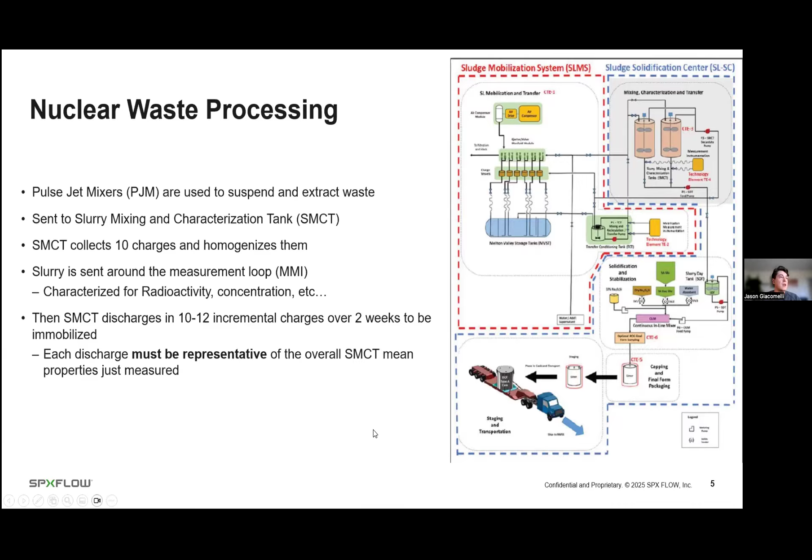We can't actually play with real nuclear waste—that's dangerous. So there's a lot of work and studies that go into developing simulants, which are then used to test all these pieces of equipment and discover how mature your technology is in terms of handling this stuff.

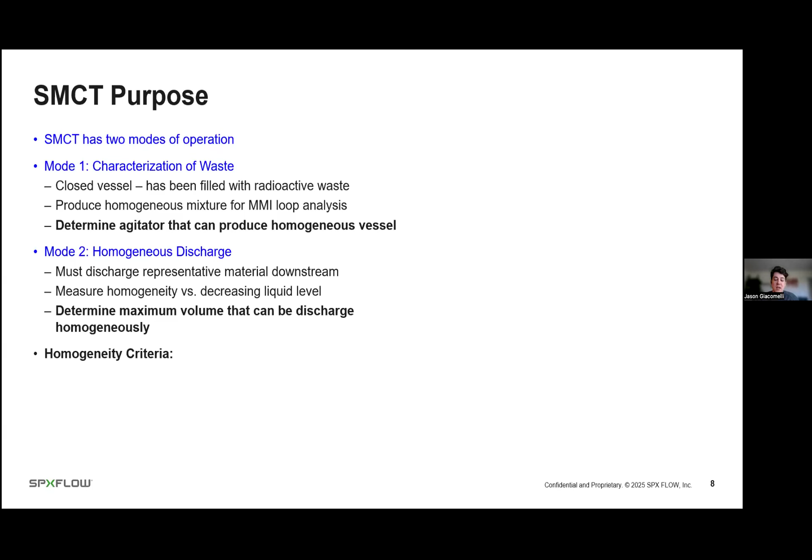The second mode is homogeneous discharge. We then have to discharge this slurry into the next stage in a bunch of different steps, and we need to make sure that whatever leaves the vessel is representative of what we just characterized. If we characterize it at a certain uranium concentration and send something that's not that concentration, that's not okay. So we basically have to show how much of the volume can be discharged homogeneously.

And then we always need criteria. So as an agitator vendor, in our experience, we kind of apply what we think we can do. Between 10 and 90% of the vessel height, we expect it to be plus or minus 10% of the mean — that would be our hopeful objective, what we think we can do.

If we also look at particle size criteria, because we can measure particle size distribution for each of these samples — that's not a measurement many customers ask for, and it really depends on the width of the distribution. So we put a wide tolerance on that originally, and we were curious what would come out of the experiments, because these experiments were laborious, a lot of work to take a sample through these tubes and then get a particle size distribution.

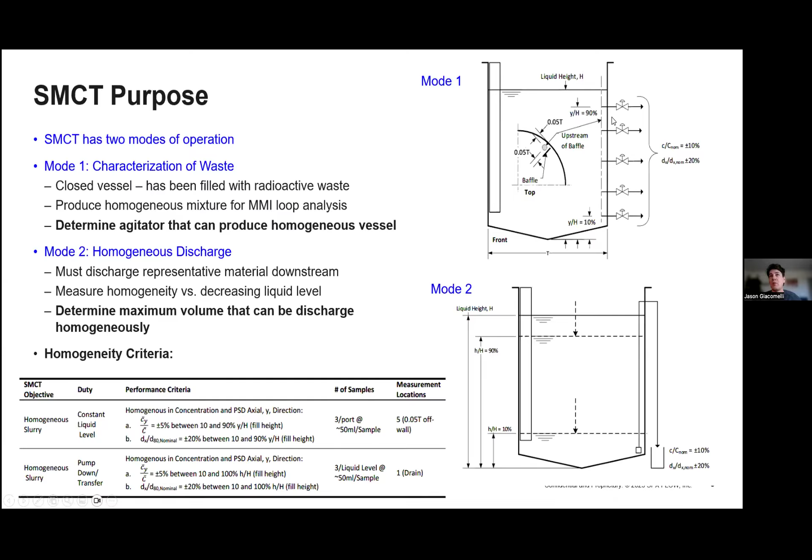So it's quite challenging. Just to give you an idea of this experimental setup — we'll bypass going into detail on the experiments, I could spend 40 minutes on these alone — but here's our mixer. We have sampling ports on the side of the vessel that we connect to a peristaltic pump, which we circulate and extract samples from.

We also have this loop that is a simulated measurement instrumentation loop, which goes through a Coriolis meter, because the customer was hoping to use a Coriolis meter to measure density and use that for homogeneity. We weren't very optimistic about that, which led us to actually modeling it to some degree. So it's an elaborate setup with multiple impellers — I can speak to that in more detail later.

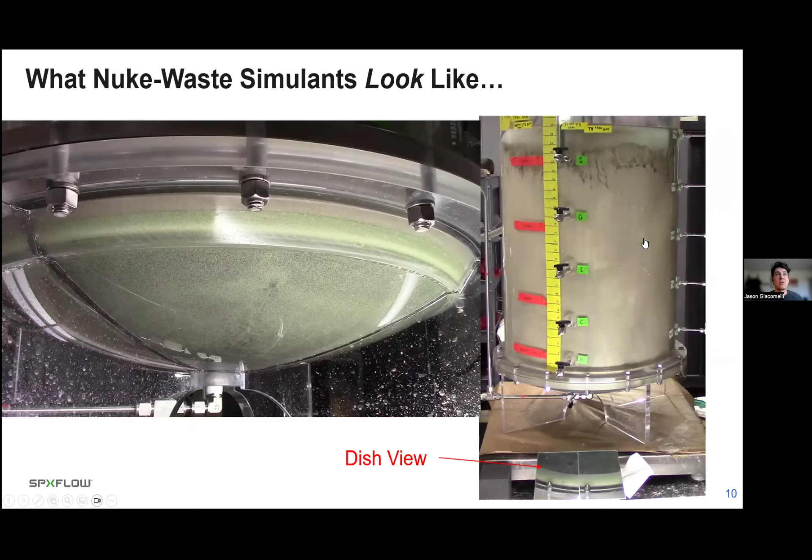So let's look at what this looks like — some nuclear waste. This is what mixing of nuclear waste simulant looks like. The material can vary, which makes it a very challenging thing to measure.

So we would take replicates, sample for a certain duration, and spread out the sampling period to try and capture the most representative samples possible.

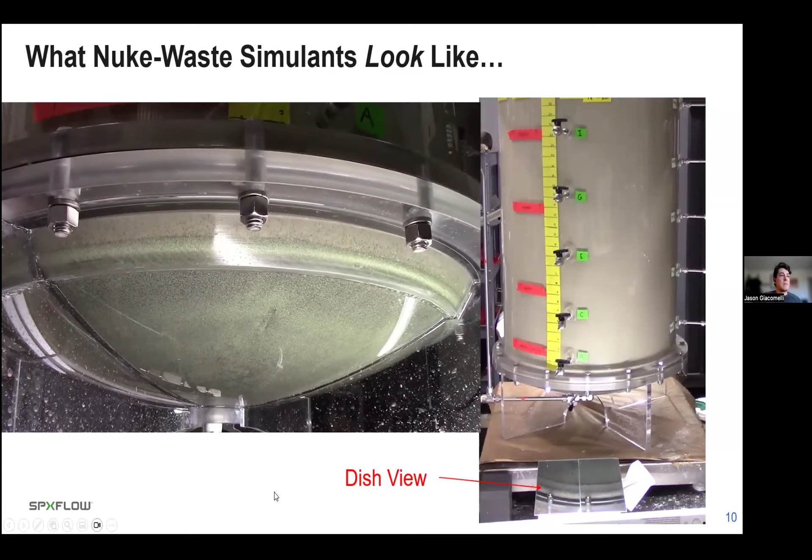There we go. All right, let's talk about the modeling approach then. Obviously you can see how complex the experiments were — let's see how complex we can make the CFD model, but also keep it practical.

So we're using M-Star — you just heard about M-Star. We're using large eddy simulation, and this version would be circa 5 years ago, basically, when we did these models.

So the fluid model is large eddy simulation — at the time we used Smagorinsky. In hindsight, I don't know if implicit large eddy simulation, ILES, was available at the time, but since then we've been using ILES most explicitly for these highly turbulent cases. Basic setting for the Smagorinsky constant.

We gave the bulk slurry properties — I'll talk about that in a minute. For particles less than 60 microns, we called those part of the liquid phase, or flow followers, and we measured the viscosity and density of that and set that to the model's bulk. We had high resolution — we had GPUs at our disposal, so 400 lattice across the tank diameter, pretty resolved, 93 million cells.

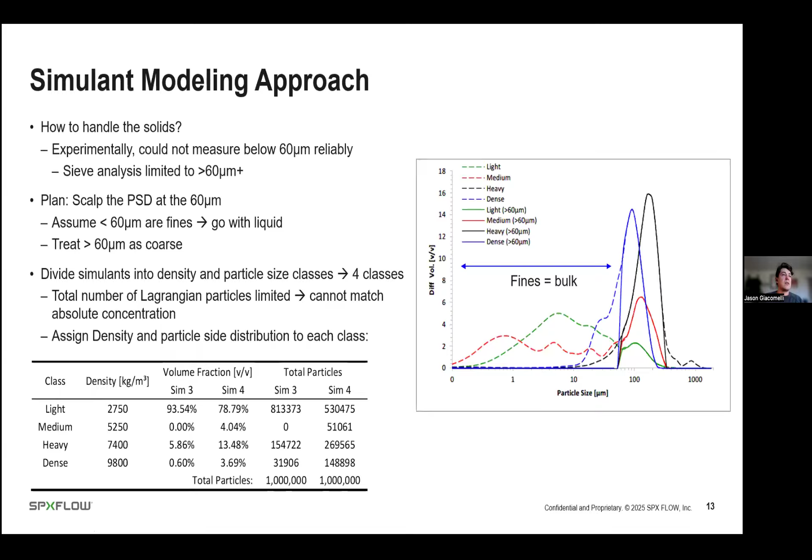So speaking next to the validation strategy, the question is: what can we measure? We can measure agitator power, torque, and speed very easily—our lab is set up to do that trivially. We also have cases where we can measure just suspended speed. Obviously if we're designing an agitator we can calculate a just suspended speed, but this is nuclear waste, so we have to measure it. We need to validate and determine what this agitator is going to do. So we measured just suspended speed.

That's a visual thing. Then we had to measure homogeneity. So we basically measured along the vessel height—concentration, particle size, as I mentioned before—using different standardized methods. Like I said, we scalped the PSD at 60 microns, and we're hoping to make the link that, because we can't separate the particles once we take a sample, based on the density class we have an idea of what the particle size is. So we can use particle size as a second measure of understanding homogeneity.

And the best part about the CFD is we can actually find those particles numerically because we put them in there and we know where they are. So that adds a little extra usefulness to the CFD.

Now, the CFD model can definitely output power. We can output concentration versus height, PSD versus height, but we can also output density versus height. So we have a little bit of extra data that we don't really have in the experiment. That's how we're going to compare things.

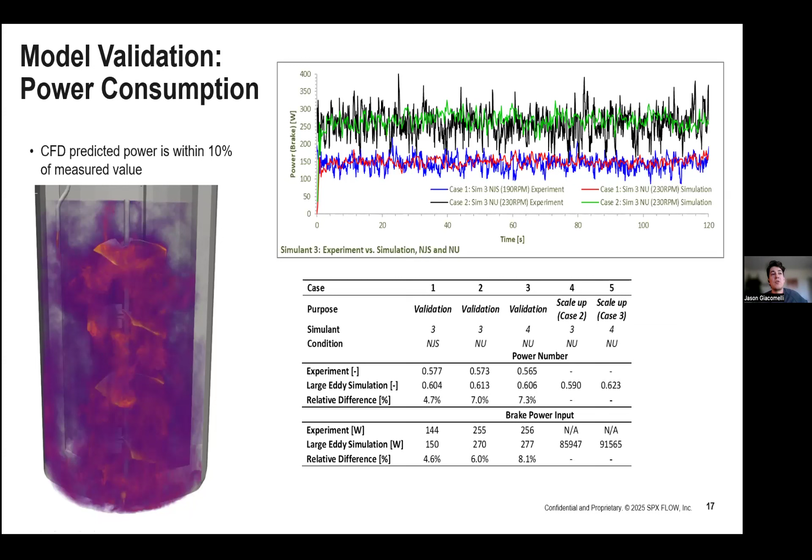Just to explain what we did at the time, because we didn't have full scale measurements when we did this part, we just compared power numbers between the small scale and large scale. We got 0.6 for the small scale, 0.59 for the large. That's pretty good agreement between scales, so from a power consumption perspective, we're pretty well validated.

Let's look at just suspended speed. Just suspended doesn't necessarily mean your slurry is uniform — sometimes it can be, but not always. The ability for the model to predict inhomogeneity is just as important as predicting whether it's homogeneous. So I like to use CFD and use these cases as test modes or failure modes. We ran the model both ways, and even though the customer doesn't care about just suspended — they want uniform — we used the just suspended speed as an indicator that our model is registering different concentrations of particles at different locations depending on speed.

Here are some images of NJS, and you can see our gray stuff is our heaviest, biggest particle — that was basically driving the just suspended speed measurement. Then here's that analogous density class of particles, shown in red by velocity, representing our dense stainless steel grit. We can see that they're collecting in a similar region, which is encouraging.

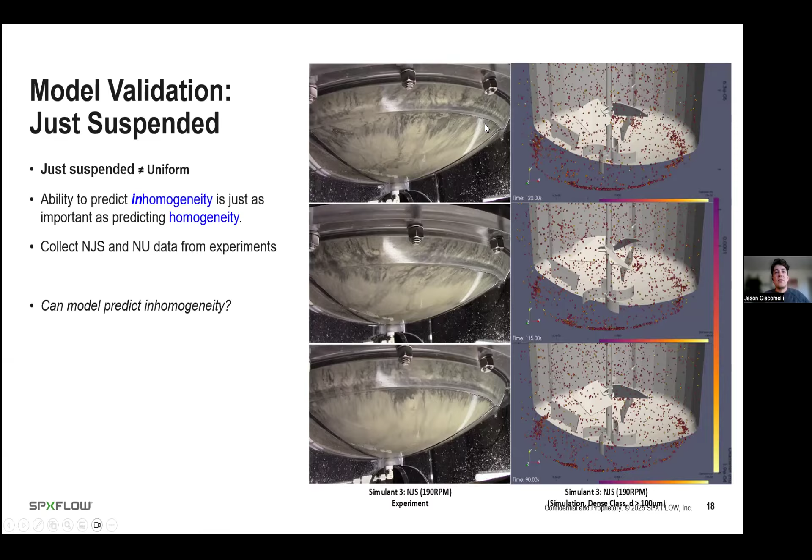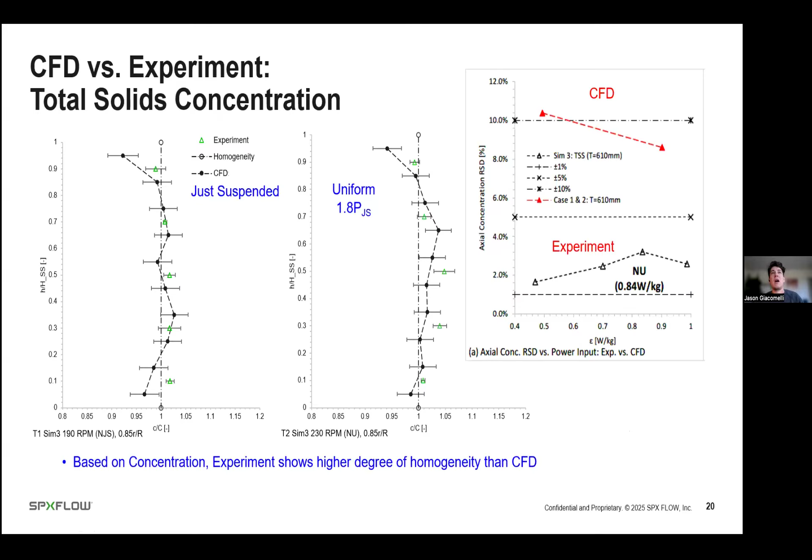All right, so let's look at particle size. We're going to look a little closer now and see if we can figure some stuff out. This plot's going to get complicated, it's going to be a 4-blocker. So we'll first start with the experiment at the model scale or lab scale.

It's a similar idea for the plot, except that we've normalized based on the particle size distribution. If familiar with cumulative passing distribution, so D50, 50% of the particles are less than this size. We basically plotted the D50, D10, D80, D90, D95, D98 for each port, each sample, and it's basically telling you how the distribution is moving, so you can look for different classes of particles and where they are.

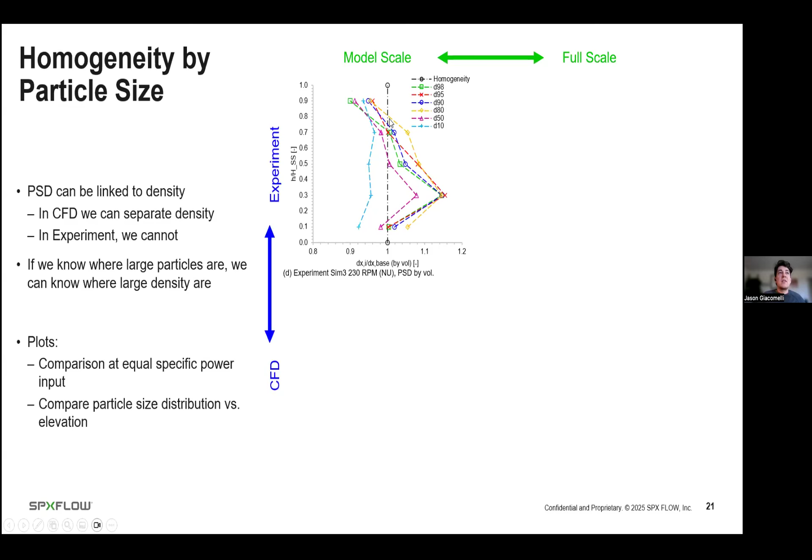You can see that it's hard to get the particles to the top of the tank. That's kind of what this leftward shift looks like, but still better than 90%. And then there's this big spike here around one of the impellers. We think this is where we lost isokinetic sampling a little bit, it's kind of strange. But other than that, it's pretty homogeneous. We'll go with that. Pretty. Looks okay.

So then we actually have full-scale data for this comparison, because they ran the full-scale tests a couple years ago, and so we have some of this data. Now, they had a lot more trouble getting isokinetic conditions and getting samples out of a tank that's 4.2 meters in diameter and 6 meters tall. So they had some challenges, but generally speaking, they didn't do half bad.

And perhaps we don't see the same artifact that we saw in the sampling issue, because we don't have the same sampling issue in the CFD. The particles are there or not, regardless of whether I can use isokinetic sampling to get them or not. So CFD modeling is not subjected to the same experimental challenges that the experiments are. So this looks pretty positive, it's saying we can do a pretty homogeneous system here.

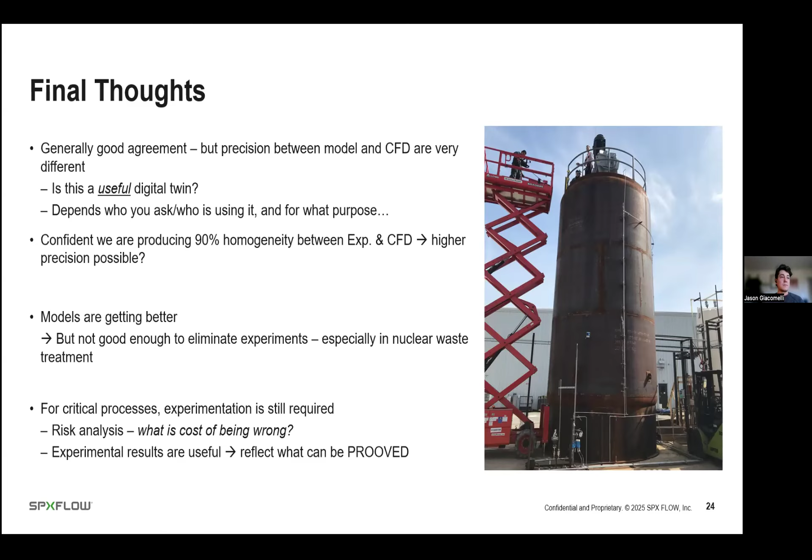And for critical processes, experimentation is still required. Like if it's nuclear waste processing, you're still doing the experiments. That's not going to go away. The cost of being wrong is too great. So yeah, I think that's all I've got to say on this. Thank you for your attention, and I'm happy to entertain any questions.

Yeah, thank you so much, Jason, for the very nice presentation. Very interesting to go into these two-phase systems. Any questions back? Maybe I would like to directly address one question.

It looks a little bit like the strongest deviations appear close to the stirrer, so at the height of the three stirrers. Can you confirm that? And do you have any idea what might be the reason for that?

Well, it's really about where you're getting the best agreement for isokinetic conditions. Now, you saw there were many stirrers, many impellers. What we kind of attribute the major challenge to was those gray particles. They were a significant concentration, and they could swing the measurement of density and particle size significantly if you found them, and you could watch them on the side of the tank.

I hope that was clear in the video, that you could see them centrifuging inside of the larger scale eddies. Now, our sample ports were about 6 millimeters in diameter. So if the eddy is 30 millimeters in diameter and you're trying to draw from that turbulent structure that's there for a certain instant in time, there's some temporal aspects, there's local chaos caused by the impeller. There's a whole lot of stuff happening there, and it looked like in some of the data we could detect that effect.